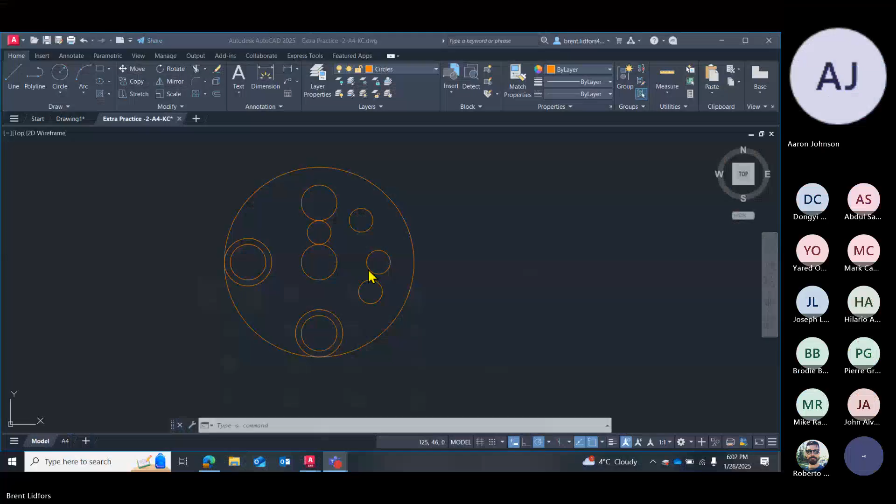So I'm going to get into our task list for this week. And let me just flip over to Brightspace here. So the week 4 folder should be available for you guys now. Let me just open it up here. We're now in week 4, so the week 4 folder is now open and available to you guys. In it is just more chapters of the textbook. Assignment 2 is posted in there, and then our weekly task list, of course. Okay, just to keep you updated with what's available now.

So starting with the task list itself, in our week 4 task list, same kind of materials here. We're just going through the textbook, kind of following along again. Nothing new there. Extra practice 1, if you haven't already done it, might be a good idea to go through it. Again, it's not for grades or anything like that, but if you do feel like you need some extra practice with some of the tools we've covered so far, it's a good idea to get through it. Other than that, for this week, we have 2 main tasks.

We're going through chapter 5 this week. We kind of started it a little bit last Thursday. We talked a bit about object selection. We're going to get into a bit more detail. We're going to talk more about editing commands this week. We have a few practice problems to cover. And then, like all the other chapters, there's a section at the end of the chapter for review questions, if you choose to do them, just to make sure you're brushed up on everything we cover in this chapter. Aside from that, we'll be covering chapter 5.

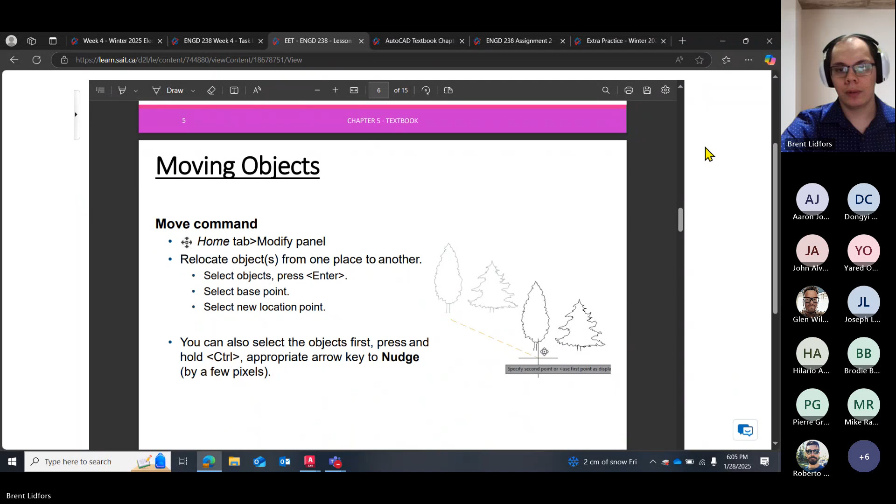So going back here with our AutoCAD chapter. So last week we talked about object selection in chapter 5.1. So we talked about the lasso tool, different ways we can select objects. This is going to become very crucial when we talk about using our editing commands, because whenever we use an editing command in AutoCAD, we have to specify which objects that we've drawn that we want to edit.

Otherwise, if I try to use something like copy, if you recall from using something like Word, if you copy paste, you have to select a block of words before you can copy and then therefore paste. Same thing with AutoCAD. You have to be able to select objects and then copy those objects in order to paste them. So object selection, it's pretty straightforward, but it is a very crucial tool going forwards.

So our first editing command beyond object selection, 5.2, we're going to talk about moving objects. So our first basic editing command is the move command. It's located in our Home tab Modify panel. You'll note that all of our editing commands that we'll be covering are in our Modify panel.

So in the previous couple weeks, we've been talking about drawing, our basic drawing commands. Those were all in the Draw panel. Now we're moving on to Modify for all of our editing tools. So starting with Move, Move is just in the top left-hand corner of the Modify panel. And this will allow us to move objects around our drawing space.

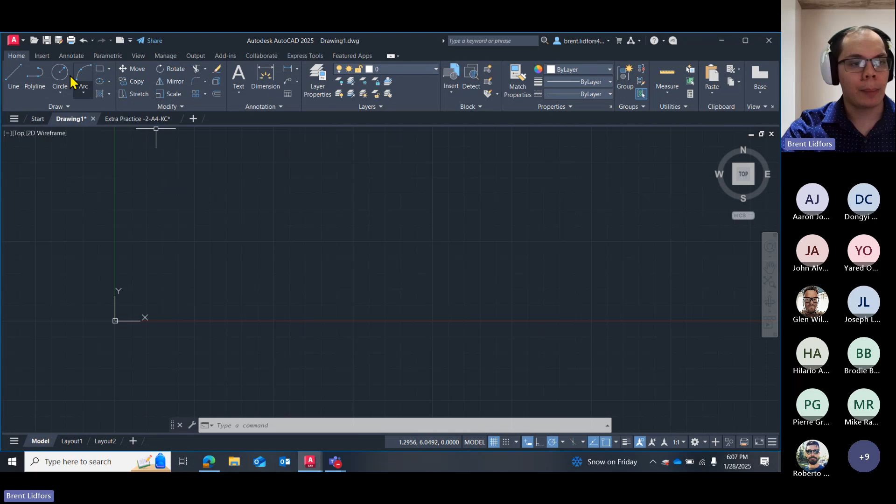If we need to relocate things, if we've drawn separate pieces of an object or an overall piece of equipment or an overall diagram, and then we need to start piecing those objects together, this is a really handy tool for that. So I'm going to draw just a few objects here. I'll just draw a circle and a line just for simplicity.

So our move command, I'm just going to click it for now. We'll talk about other ways we can use move, but I'm just going to click move. And you'll notice that my crosshair changed from a plus sign to a little box. So outside of the move command, I have the standard crosshair. When I go to select move, it's now a little box.

And I get the prompt there from my dynamic input that says to select objects. So AutoCAD's prompting me in two different ways that I am now supposed to be selecting objects. Whenever our cursor turns into that square, that's also the selection tool. So I know I'm in a scenario where I now have to go select objects.

So we talked about object selection. I can select this circle on the left-hand side in a few different ways. I can just left click on it. I can use my lasso tool to lasso around it. I can just left click on it and it'll highlight in blue. Whenever my objects are highlighted in blue, that's also AutoCAD letting me know that that object is selected.

So I've selected my move command. I've now selected my objects. The next thing to do is either hit enter or right click. Either one works to move on to the next part of the command. So I'll hit enter. And now AutoCAD's asking me to specify a base point or enter coordinates.

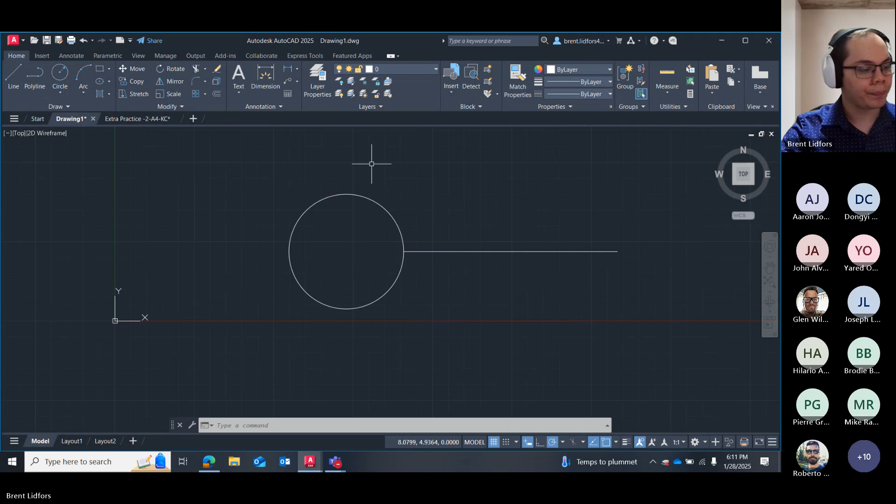So using base point in conjunction with your object snaps helps a lot with precision as well. You'll notice as well when I use the move command, and again, I'm going to grab the center point of the circle. As I move my cursor around, I have a gray outline of where that circle used to be. So it's letting me know where that circle was and now where it's going to be.

And I have a little orange dashed line that's called the rubber band. And the rubber band is also giving me kind of a heads up of where that circle is moving to. Just in case I'm scrolled away somewhere over here and I can't see the original, then that rubber band also helps notify me of where that circle's coming from. So I can come back and then see where I'm pulling it from.

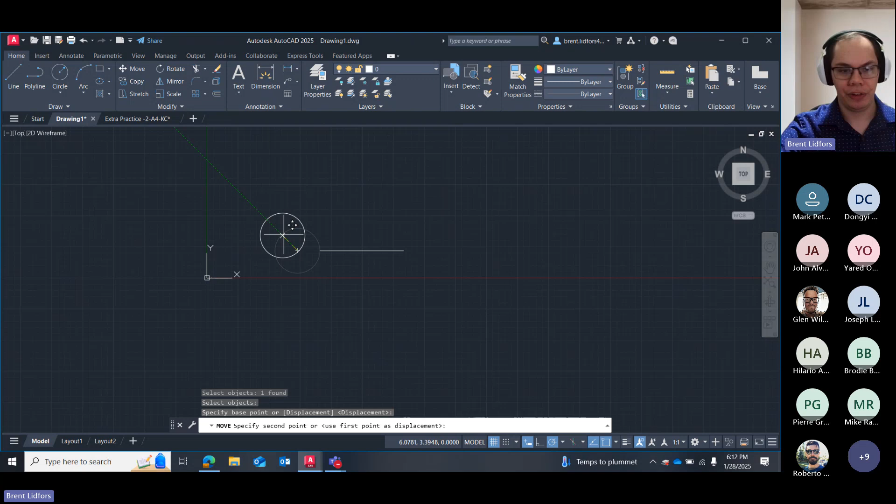We don't necessarily have to use object snaps only or click to select where this circle is going to move. You can see now that I've selected my base point and I'm moving this circle around, I would be able to click or I can use object snaps, but I also have the dynamic input prompt notifying me there that I can select a second point by using a distance and an angle.

So I don't have to click in order to place this circle. I can also add distance angle. So I can put something like 20 units, 90 degrees, and that will move my circle up 20 units, 90 degrees being north.

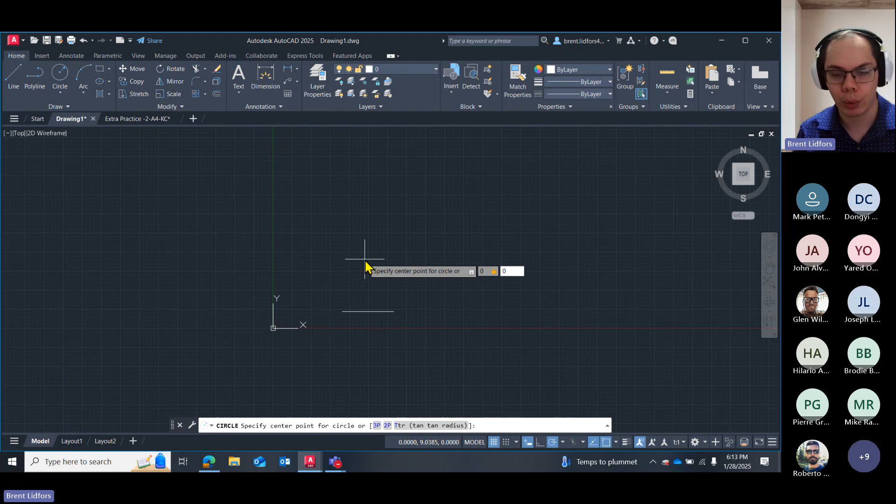And just like the line tool, instead of using a length angle, we can also use just straight up coordinates. So if I reset this circle, I'll draw a new circle just for flow here. I'll draw a new circle at the point 0, 0, just at the origin. Give it a radius of 10. This doesn't really matter, just kind of to prove a point here.

If I move this circle by its center point, I can then also use coordinates to move this circle. So I don't have to use length angle. I don't have to click. I can also use coordinates, where if I type something like 5, 5, this is going to move the center point of that circle 5 units to the right and 5 units up. So then when I hit enter, now the center point should be located at 5, 5.

Keep in mind, if you do use this method to move that circle around, the coordinates are relative. So if I do another 5, 5 here, it's going to move another 5 to the right and another 5 up. And now the center point will be at 10, 10. So if you use the coordinate method, just keep in mind it's relative. If it was originally at 5, 5 and I add another 5, 5, then it's going to be at 10, 10 as the final location there.

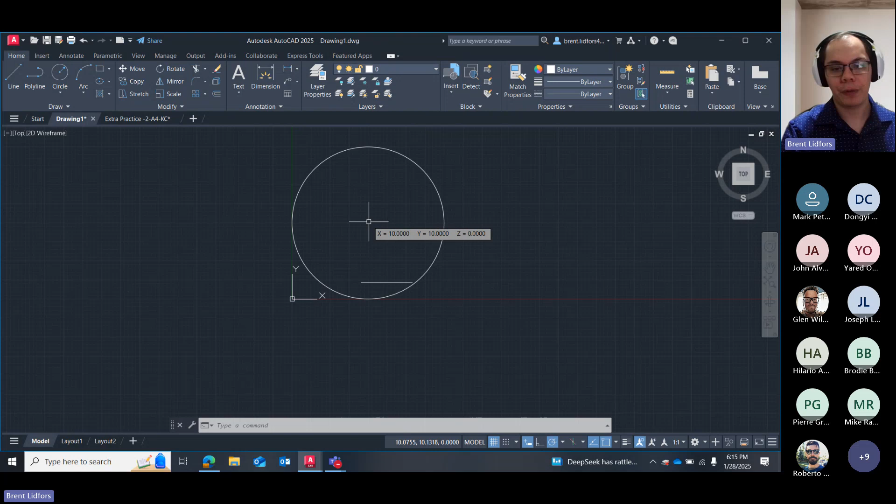Okay. So to kind of summarize, with using the move command, if I just have any circle here, I select move. Move is going to tell me on my prompt there to select objects. I select the object. I can highlight in blue. I can lasso it if I want. I'll then press enter to move on to the next step. Specify the base point or handle of this circle.

And then I can use any of the three methods. I can either use object snaps or just freehand click to select where this circle is going to be placed. I can use a length angle, or I can use coordinates to move this circle to choose its final location.

Okay. Any questions about move so far? All good? Okay.

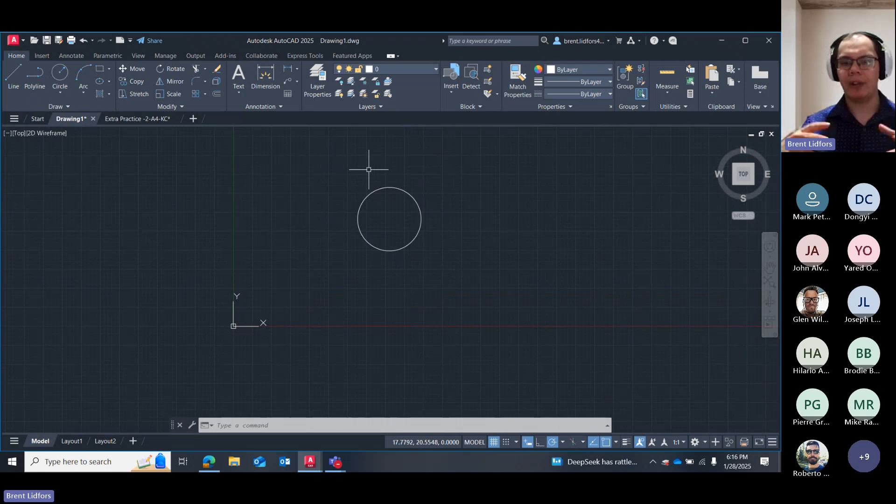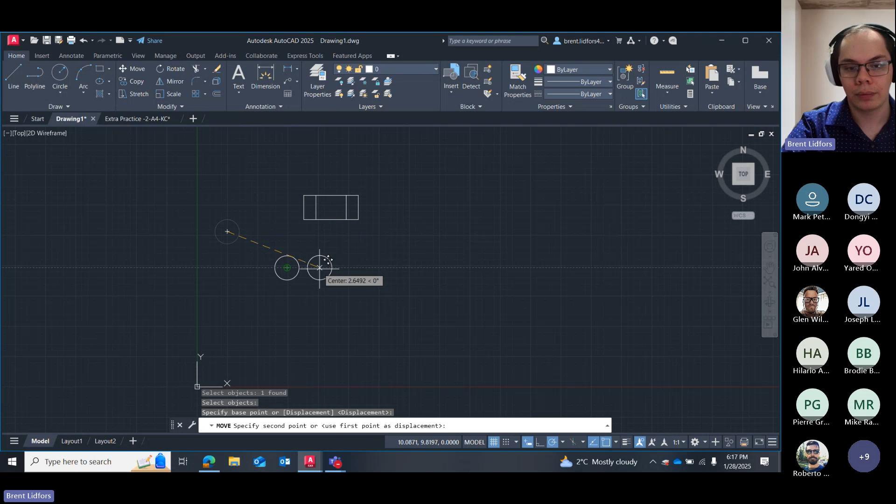I can easily use move here to move this circle. And then using object snap tracking in this case, I can type 8 and hit enter. And now I know these two circles are 8 units apart from each other.

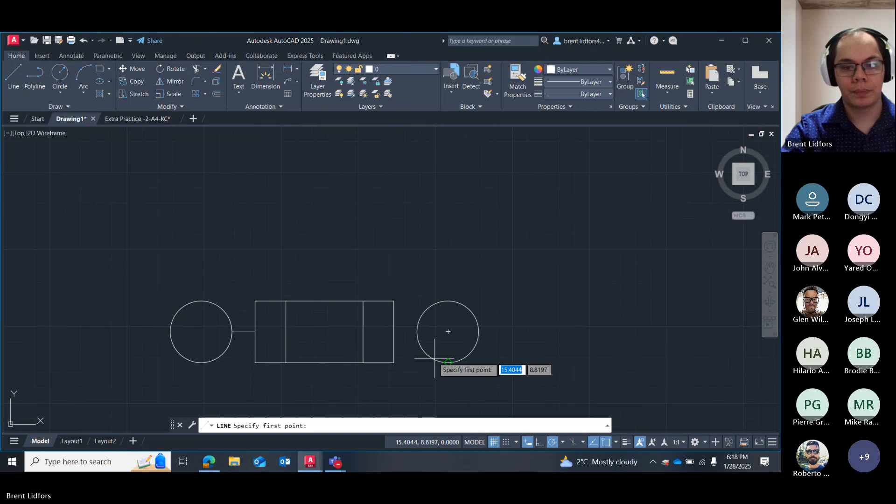And then I can take this rectangle here, using its geometric center snap, moving it by its geometric center, and I made these 8 units apart, so the center point should be 4 units across to place it right in the middle, and then I can finish it off here. And there's my fuse. So I pieced together the different objects there, and also with using object snap tracking, I was able to move the circles into the correct place for spacing as well.

A couple other things with move as well. If I have an object, I'll just draw a circle for simplicity. We don't necessarily have to use the move command itself. You can click on move, or you can type MO, MOVE. I believe the even shorter hand is just M.

If you want to use the command line, M will give you move. You can click on it if you want. If you don't want to use the move command at all, just because you're doing something really quickly, we also have a couple other ways to move objects outside of the move command.

One of these methods is by selecting whatever object I want to move. We'll highlight it in blue. And then if I just simply click and drag this object around, it will move it. Be careful not to click on the grips, these little blue squares. Those are different editing commands. If I just click along the highlighted blue line anywhere, I should be able to click and drag that object around.

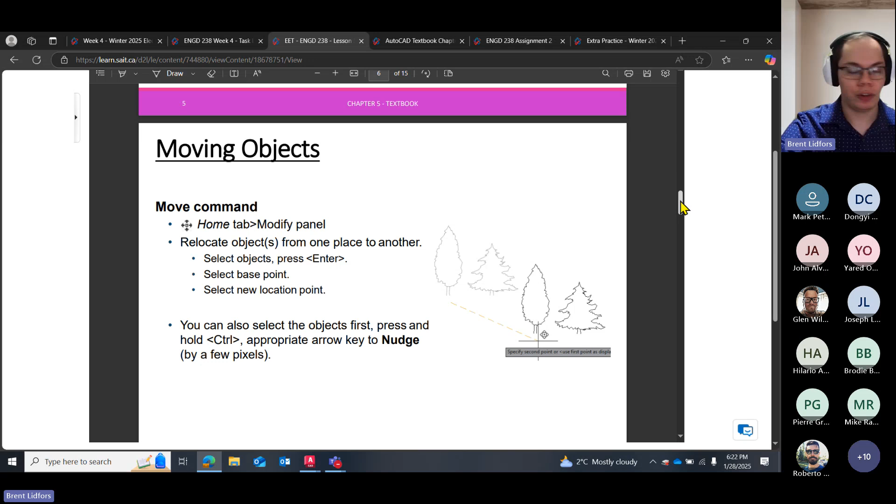So that pretty much covers moving. Speaking of which, we'll move on to 5.3, copying objects. Copying is going to work very functionally similar to moving. There's a few things to note when we're doing copy as well. We'll go through it here. I'll open my AutoCAD.

The copy command is going to allow me to make duplicates or copies of existing objects. If I have a circle here and I want more of this circle, I can use copy to make more of this circle. The copy command, just like move and most of our other editing commands, is in the modify panel. Here it is, copy. I can click on copy to make it the active command, or its shortcut is CO. CO will give me copy as well.

Just like moving, you can note right away that it's giving me the little selection box instead of my crosshair, so I know I'm supposed to be selecting objects. Again, my dynamic input also lets me know. But just in case you have dynamic input off and it doesn't show that, that selection box also lets you know you're supposed to be selecting objects.

So just like with move, I've selected the command. Now I need to select my objects. I'll choose this circle here as the object that I want to copy. Again, I can lasso it, or I can just click on it, whatever means you prefer. Once I've selected my objects, in order to continue with the command, I need to hit enter.

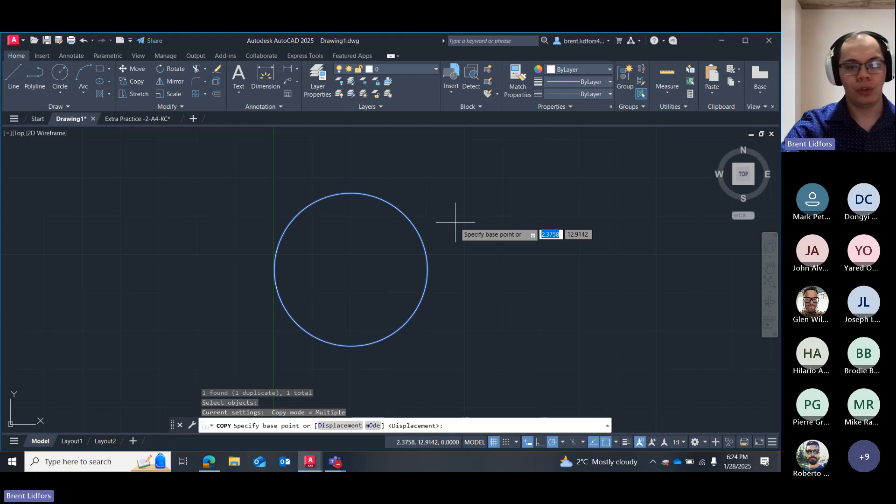And just like with move, it's asking me for a base point. Again, I can use any object snaps on this circle as a base point, or I can click anywhere else. Functionally, it works the same way. So I'm going to use the center point. And now, after I've selected the center point as my base point, I have that same rubber band showing me where the original object was and where this new object will be. Again, I can enter a length angle, or I can do coordinates instead.

When I hit enter or click, it will make a copy there. You'll notice right away after making that first copy, you do not exit the copy command. Unlike move, where I moved the object and then it exited me out of the command, with copy, I've made that first copy, and now I can continue to make as many copies as I want until I tell AutoCAD I'm done by hitting escape.

This is very similar to lines, where AutoCAD keeps prompting you to make line segments until you tell it to stop by exiting the command. So I can keep clicking, keep making circles, but as soon as I hit escape, then I'm done with my copy command.

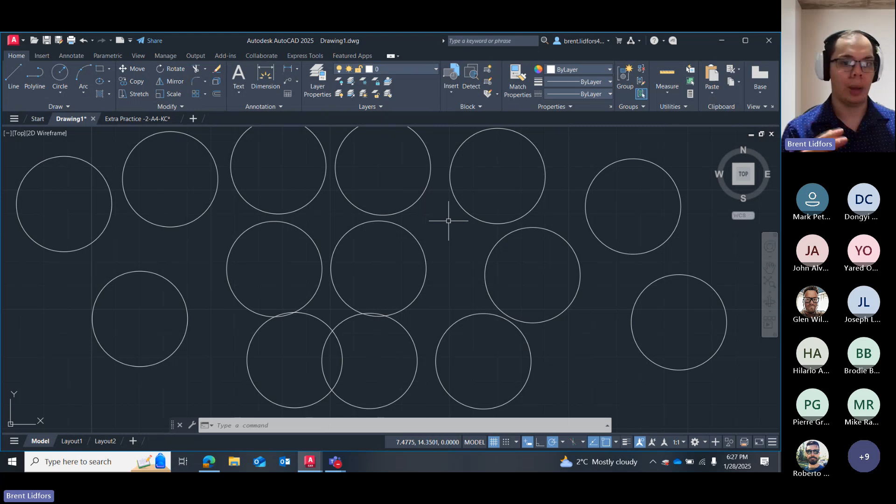So just to demonstrate here, I'm going to get rid of a bunch of these circles. We'll cover this in more detail later, but just for demonstration purposes, I'm going into my properties panel here.

At the top, this drop-down menu that says by layer, beside this little color wheel, I'm going to change this to red. Or maybe yellow - yellow's a bit brighter. So my circle's now yellow. Once I've selected it and changed it to yellow, now if I copy this circle, just to prove the point, if I copy and paste it, all of the pasted copies are also yellow. So it copies everything about that object, not just the shape itself.

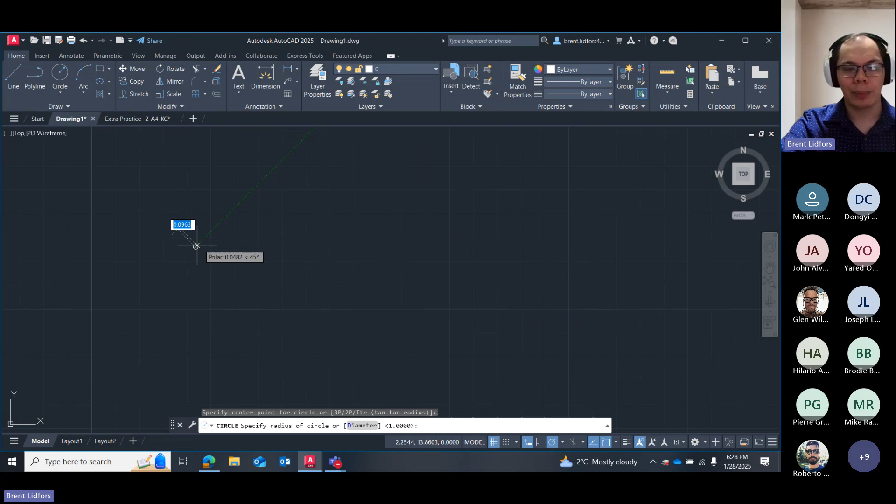So going back to my circle here, similar to move, I can select this circle so it's highlighted blue. When I click and drag, this was our rapid way of moving that circle. But if I click and drag and then hold Control and let go of my mouse, I make a copy. So this is also the rapid way of making copies.

To go through that again, I've selected the circle here, highlighted it blue. Just like with the move command, I click and drag the edge of that circle, just like when we were moving, but then I'll hold Control. You can see the little plus sign shows beside my cursor when I hold Control and let it go. So while holding Control, I can let go of the mouse and it'll make a copy.

But you must click and drag first - you can't hold Control and then click and drag, it just doesn't work that way. There's a different command in 3D AutoCAD that uses that order of operations, so it doesn't work here. You have to click and drag the object first, then hold Control, then let go.

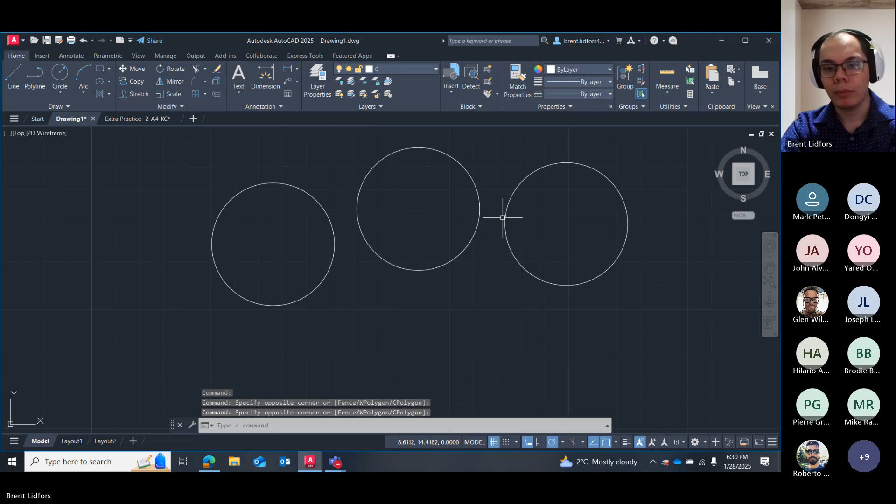Something to mention as well with the copy command is when, after I've selected my object, hit enter, selected my base point, and made at least one copy of this circle - so I've made that copy in the middle there - I can now use the down arrow menu to select undo. So again, very similar to line segments, where you can repeatedly make line segments and then use the down arrow menu or U to undo each individual line segment or copy in this case.

So I can make a few of them here.

Make a bunch. Every time I go down to undo, it's going to undo the most recent copy I've made. Same if I do U, I can type U and hit enter. This is the method to undo within a command.

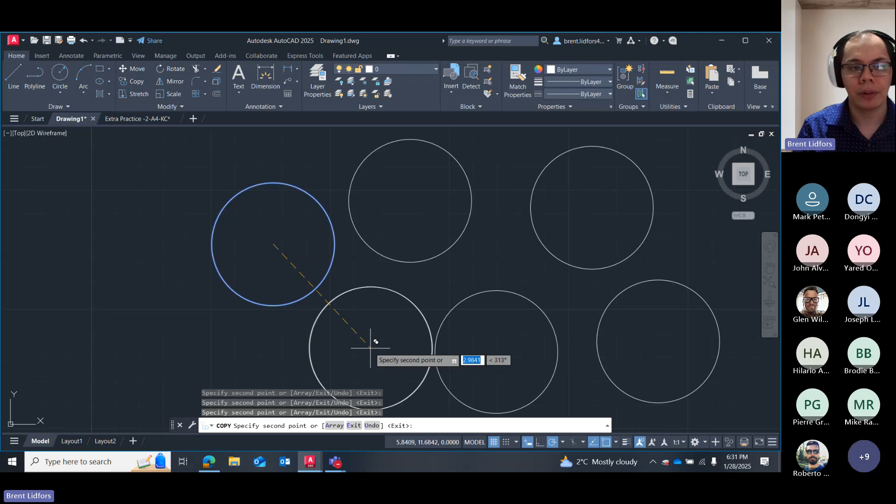The undo at the top here is on a command basis. So if I spam this undo up here, I might go too far and accidentally undo some commands. It's a little safer to do it within the command, because then you can't accidentally undo other commands you've done prior to the copy.

If I draw some lines here, and then go do my copy, just to show the point here, if I use undo or Ctrl Z a bunch of times, I might accidentally get to the point where I'm removing other commands. But if I do it within the command, I don't have that risk.

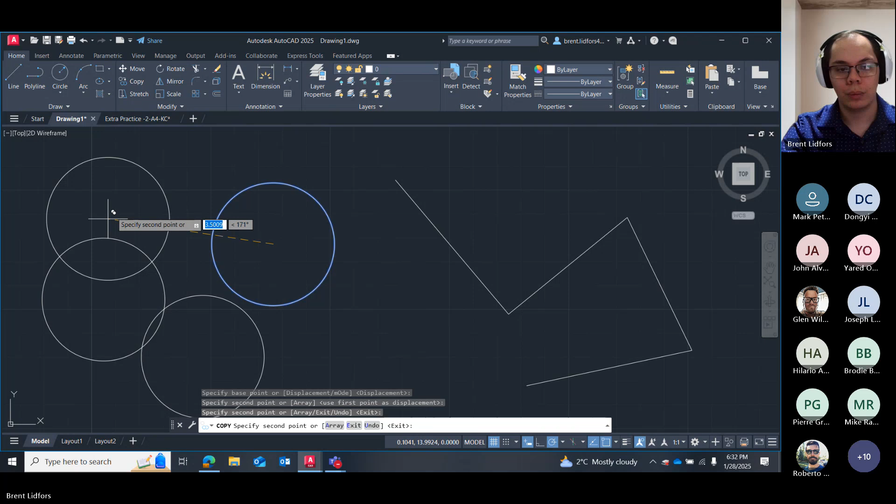Or if I make a bunch of these and keep typing U and hitting enter, it's eventually going to get to the point where it just starts denying my undo requests.

There's a couple other ways that I can copy as well. With the circle, instead of using copy or CO or clicking and dragging, we can also use our shortcut menu. If I select the circle and right click on it, that gives me the shortcut menu. Remember, whenever you use right click to enter a menu, it's called the shortcut menu.

In here, I have a section called clipboard. In clipboard, I have my cut, copy, and paste. We have a couple options for cut and copy as well. We can copy without a base point, or copy with a base point.

This is going to control whether or not I'm selecting this object with a base point. If I do not select a base point, AutoCAD automatically assigns a base point to the bottom left of the object. So copy with base point lets me select where that base point should be, like the center.

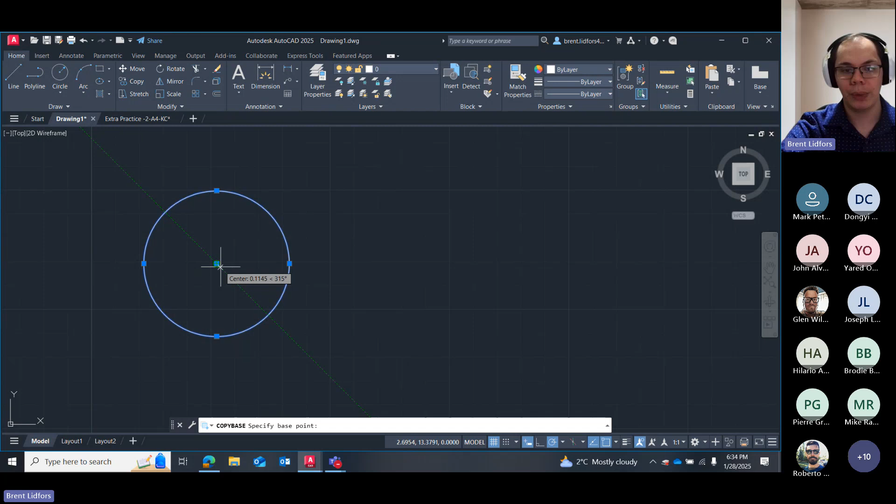Then when I go to paste, by right-clicking, going to paste, now I have it by the center point. But if I choose to copy without a base point, and go to paste, now AutoCAD's automatically assigned a base point to the bottom left of that object.

Right-clicking anywhere, using clipboard and paste, will recall what I've most recently copied or cut. The clipboard paste works functionally the same as most other software. If you used copy and paste by right-clicking to the shortcut menu in Word or Excel or anything like that, functionally it's the same thing, except for the added caveat of the base point, because we're drawing objects.

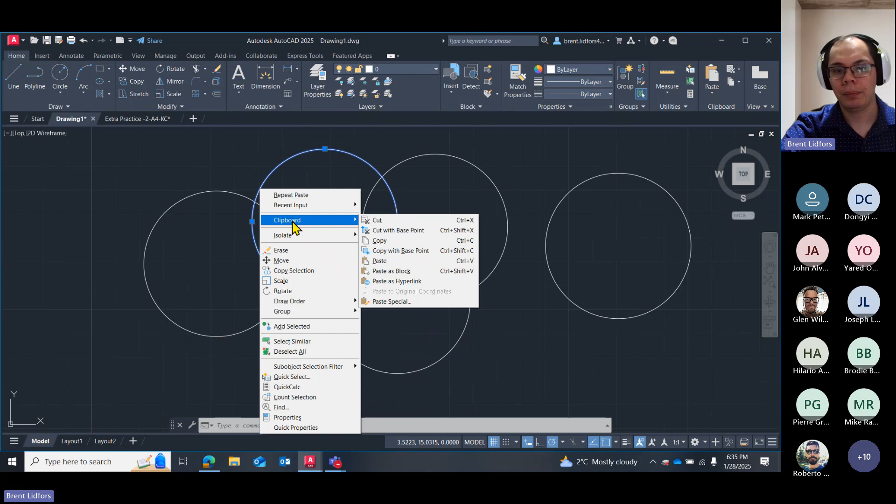With cut, copy will leave the original intact, but if I use cut, the original disappears, but I can recall it with paste. So the only difference between cut and copy is if I want to leave the original intact. Copy will leave it there, and cut will get rid of it.

So if you prefer to use the shortcut menu because you don't like reaching up here or you don't like typing, if you prefer using mouse only, those are methods to do so.

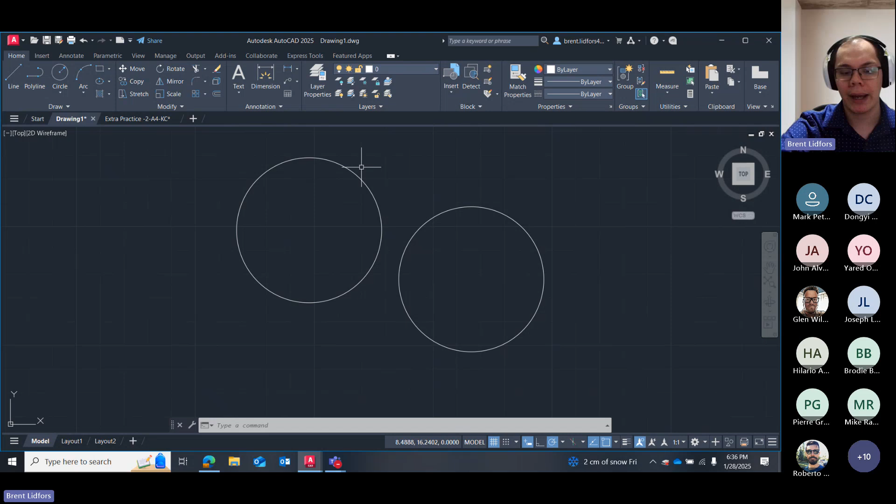We can also use the shorthand, the shortcut for copy and paste as well. You might be familiar with Ctrl-C, Ctrl-V. Those also work in AutoCAD. If I use Ctrl-C, I just have to select the object first. Ctrl-C, Ctrl-V will also give me the option to paste.

I'll use a rectangle just to show I'm not using the previous command here. So Ctrl-C, Ctrl-V. Ctrl-V will recall that rectangle. Keep in mind, this is the shortcut way of using copy and paste, so it's not going to let you specify the base point.

If I want to specify the base point and use the shortcut key, I have to do Control-Shift-C, and that will ask me for base point. So Control-Shift-C, it'll give me base point, select the base point, and then when I go to Control-V, I can place it wherever based on that base point.

I'll use not the bottom left to prove my point here. We'll use a geometric center. So Control-Shift-C, use the geometric center here. Control-V brings it back up with the base point.

You can also see when you go into the shortcut menu under clipboard, it also gives you the keyboard shortcuts here. Copy being Control-C. If you want to use it with a base point, Control-Shift-C. Paste being Control-V. We're not using paste as block just yet, so mostly these first five here.

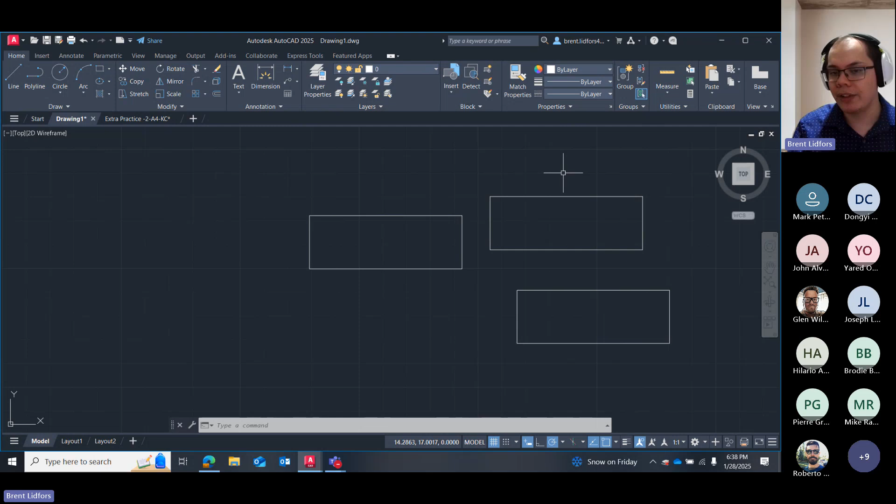If you're moving around text, you might not care about precision that much. Or if you're drawing a diagram and the dimensions don't matter because it's just a diagram, then maybe you don't care. So it's up to you, and it's up to the application as well.

Any questions about copying before we move on?

Well, that's very good. Thanks. Yeah, no problem.

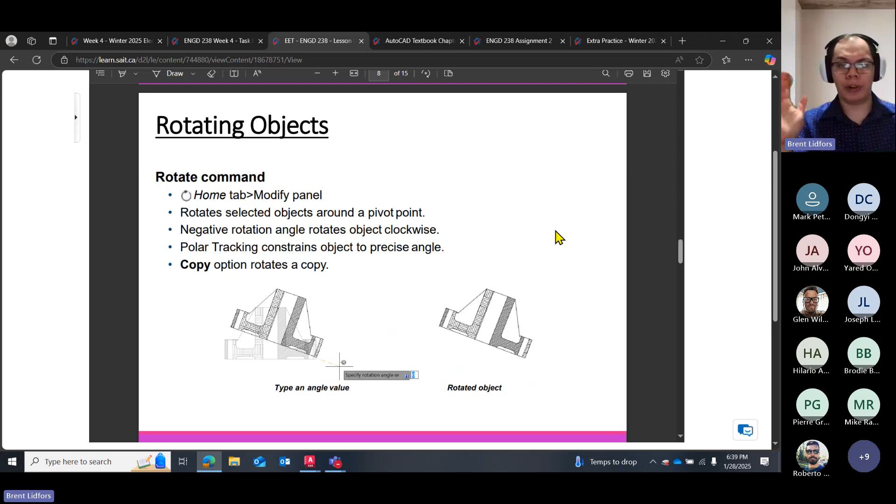Okay, continuing on then. Moving on from copy, we have rotate. It's often handy to rotate objects. Sometimes we draw them perpendicular, right side up, so it's easy to draw and easy to conceptualize when drawing. Then maybe we have to pivot it at a weird angle so it connects to something else later. Plenty of reasons why we might use rotate.

I'm going to draw a rectangle because my circle won't be obvious for rotating here. With rotate, being in our modify panel again, top center, if you choose to use the shortcut it's RO, or you can type out the whole word rotate. This will also give me rotate. Just like our other editing commands, it's going to have a selection, it's going to have a base point, and so on.

With rotate, I select objects, hit enter, and now specify the base point. In this case the base point has a slightly different definition. Rather than the handle I'm grabbing to move or copy, this is now my pivot point for rotation. So this is the center of rotation. If I choose the bottom left corner of this rectangle, I'm now spinning that rectangle around that bottom left corner. In some cases with move and copy, you might not care where the base point is that much, but with rotate it's going to matter quite a bit.

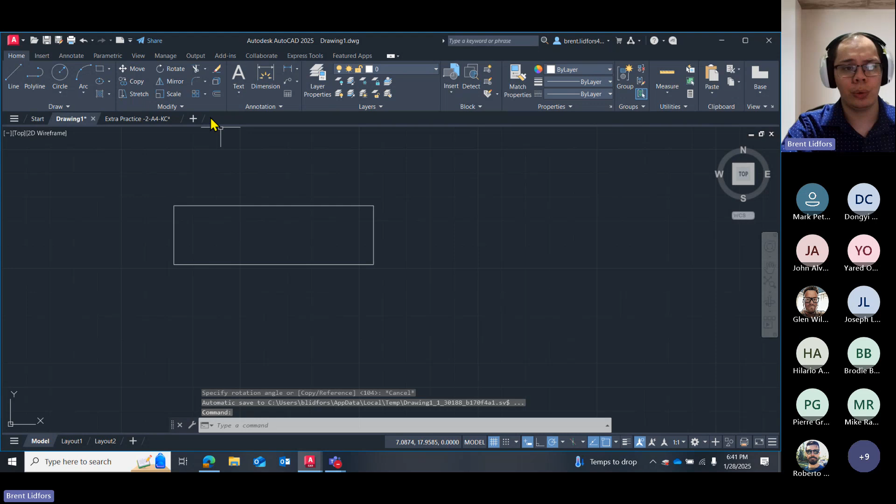If I choose rotate and select the base point somewhere off the rectangle, it's going to rotate around that point. That might cause some differences because the radius of rotation is now larger than if I pick the corner.

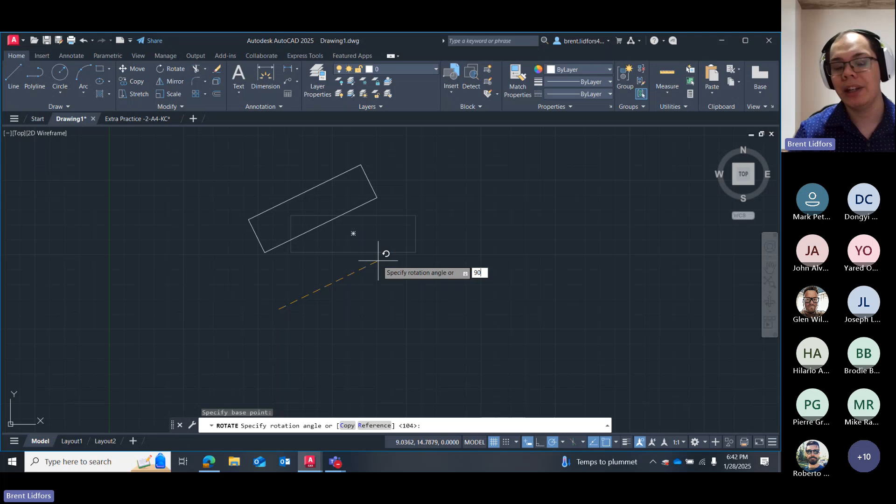After I've selected that base point or pivot point, I can move my cursor around and the new object will be shown there, with the old object grayed out in the background. I can freely rotate my object. On my dynamic input, I can also specify the exact angle of rotation. So if I put 90 in here, it should stand my rectangle up vertically. Hitting enter, my rectangle is now vertical.

Something to keep in mind here: the rotation angle is always counterclockwise for the most part. This isn't like other tools where it was 180 degrees on top, and if you move your cursor below it flips to the other 180 degrees going clockwise. This is always positive counterclockwise.

Therefore, if I want to move this clockwise, I can make a negative angle instead. So if I do negative 90, it should rotate so the rectangle's down here, because that's 90 degrees clockwise. It shouldn't be on the left—if it was on the left, then it would be a positive 90. So negative 90 sets it down to the right. And if I undo that and do a positive 90 rotation, then it should be down to the left here.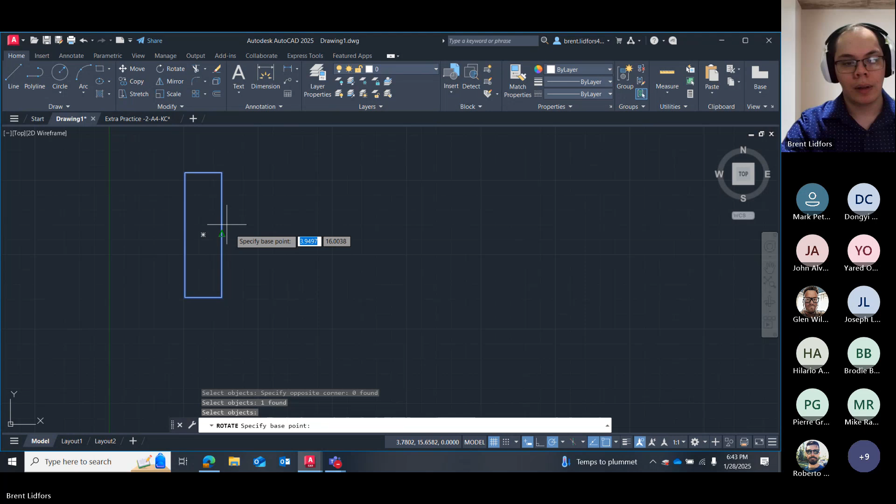When you enter this number, it's always going to be positive counterclockwise, and negative will put you clockwise. So I can put angles greater than 90, even greater than 180. If I undo again here, negative 90 degrees should flip it down to the right. So that should also be equivalent to positive 270 degrees. If I do positive 270, that should also lay it flat down to the right. Either way works, whatever makes more sense in your head.

If you want to change it so clockwise is positive—which is why I say it's not technically always positive counterclockwise—you can change it in the settings. If you go to your application menu, drawing utilities, units, you can change your angle to be clockwise there.

That's up to personal preference. Standard convention is counterclockwise positive, but if you do prefer it to be clockwise positive, then this is where you can do that. Okay.

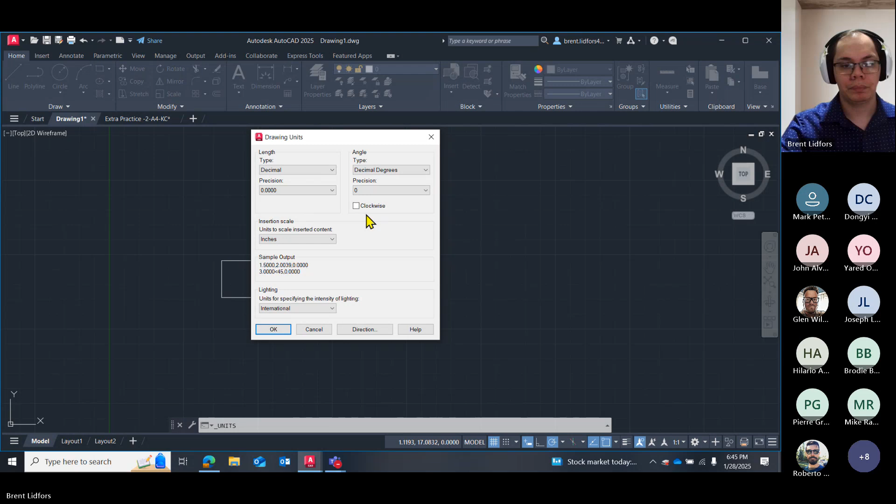Something to keep in mind with rotate is that with copy and move, we're very reliant on object snaps if we want to do it quickly. Rotate is going to be a bit more reliant on polar tracking to be accurate. So if I rotate this object, and I don't necessarily want to go through the typing to specify the angle, I might use polar tracking to help me out with that angle. So I can use my polar tracking angles to snap to those specific angles.

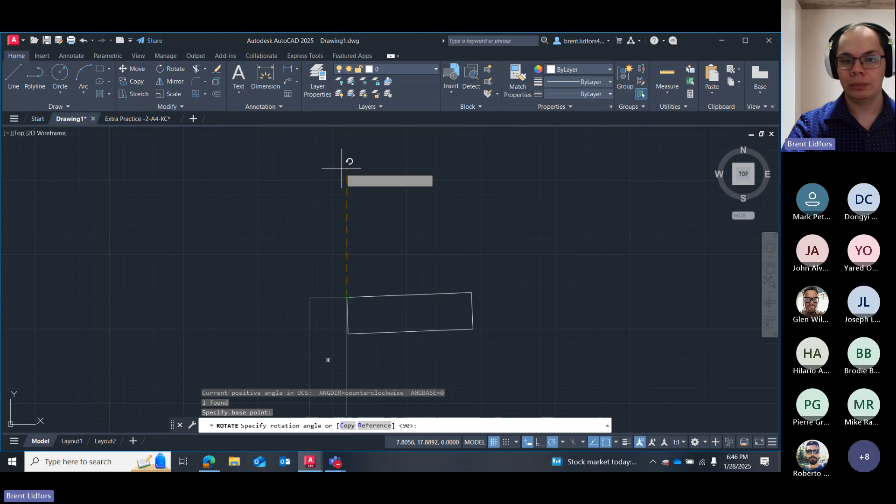Just in case I don't want to type if it's a bit too slow, I can quickly at a glance know that this is 90 degrees, so I can quickly snap it. Same if I need to move it another 90 degrees or 180. It's a quick way to snap to a specific and precise angle to rotate that object. So use polar tracking in tandem with rotate to make sure your angles are precise.

It might be precise when I first drew it, but if when I go to rotate it, it's not an exact amount of degrees of rotation, then I can develop some imprecision in my drawing as well. Okay.

Last thing with rotate is that when I select my objects with rotate, move on to the base point, I've selected my base point. I'm now rotating the object here. I can also use copy in tandem with rotate. So I'm rotating the object, but if I press down arrow for my dynamic prompt little extra menu here, I also get copy in this menu.

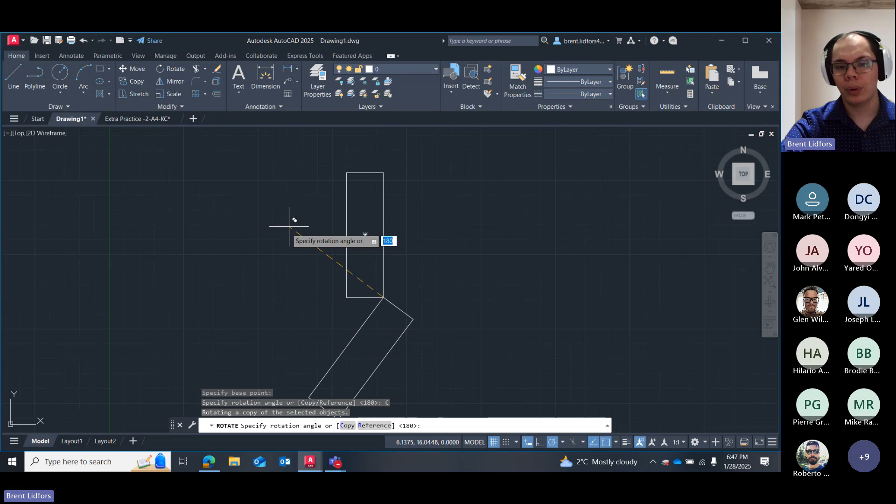So going to copy and hitting enter, you can see that my original is now highlighted white again. It's no longer grayed out. And I have the new rotated object. So this will leave the original intact and make a copy that is now rotated. So I can do copy within the rotate command.

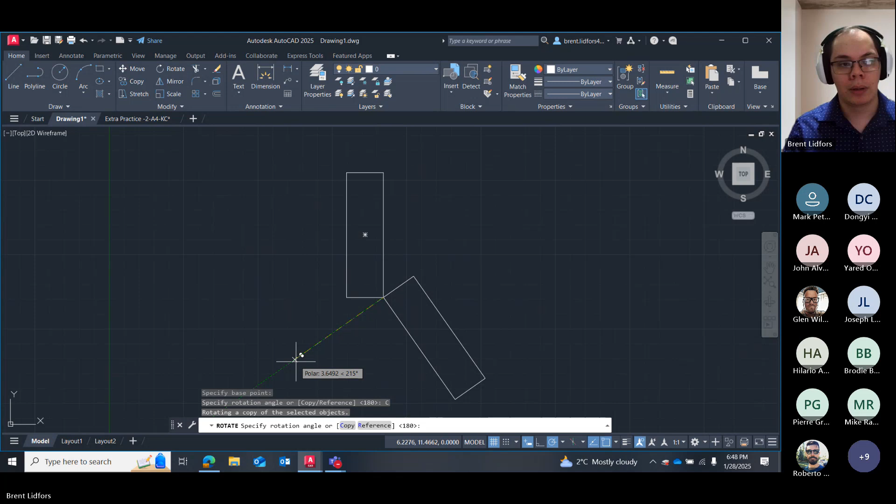This is handy if you need to do something that has some sort of radial symmetry. If I have one rectangle upright and I need to do another one down here or at 45 degrees or something, then this would be an easy way to make duplicates, but there has to be some sort of radial component to it. It has to be rotationally part of that equation. Otherwise, I just use a regular copy command, right? So then I can hit enter, and now I've made a copy and rotated the copy at the same time.

Okay. Again, if you prefer using rotate and copy as separate commands, you don't want to mix them because it gets a bit messy, by all means, use them as separate commands. It's just a way to speed things up. Okay. Any questions about rotate? All good.

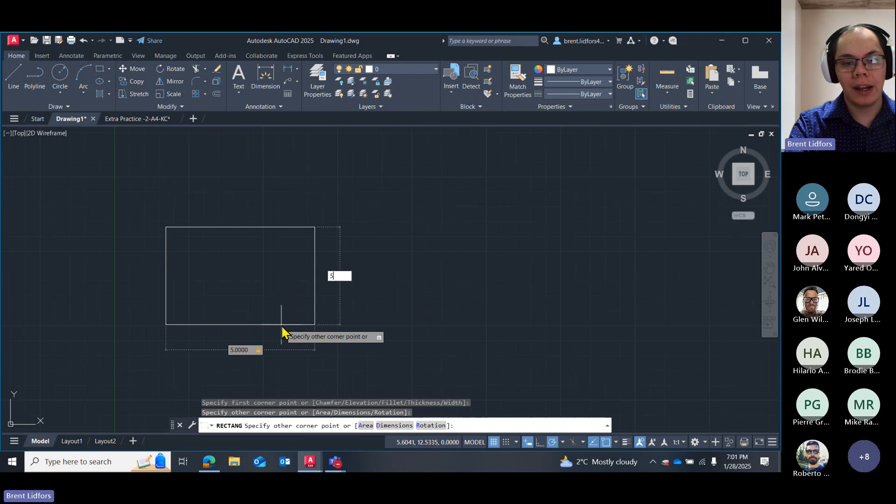Again, I'm going to draw a rectangle here. Let's just do a rectangle for ease. I'm going to make it 5 by 5. It's a 5 by 5 square. And with the scale command, I can select it from the menu. I can type it in here, SC for scale. And just like all the other editing commands, it's going to ask me to select objects. So I can lasso, I can left click, whatever I need to do to select that object.

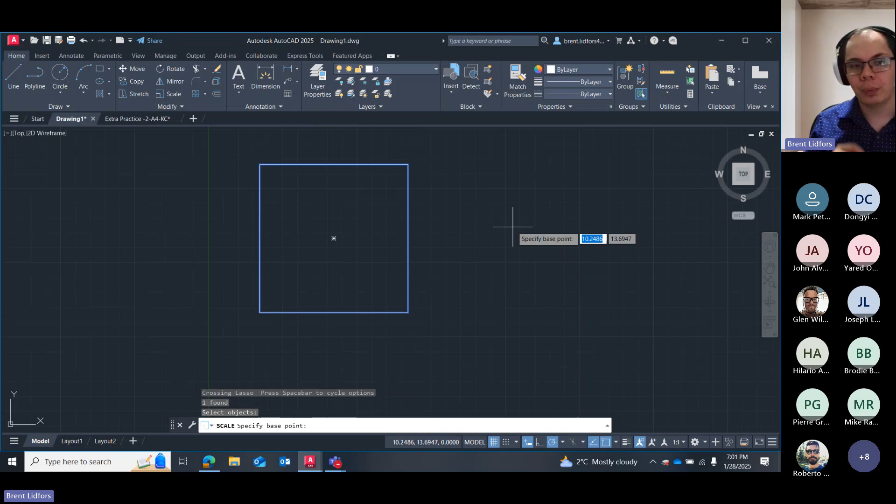Hitting enter to confirm that I've selected all of my objects. And then specifying the base point. So the base point with scale isn't highly critical in most cases. If you want to keep it in one same spot, it can be handy. This base point is going to be the point that this shape will expand or contract from. So if I choose the bottom left corner of this square, now I am expanding and contracting that square based on that corner piece.

Okay. If I exit out of this command, I can also use scale, select the object, specify the base point as the geometric center, and now I am expanding and contracting around the geometric center of that square. So all sides are moving equally. Okay. So this is the point in which I am expanding or contracting that object by.

I can move my mouse cursor to expand and contract that square, or I can type in or specify a scale factor. So you can see on my dynamic input there, it says specify scale factor. Any number smaller than 1 is going to decrease the size of my square. If I use exactly 1, it's going to keep the same size because I multiplied the size of that square by 1, so it should keep the same square. And any number larger than 1 is going to increase the size of this square.

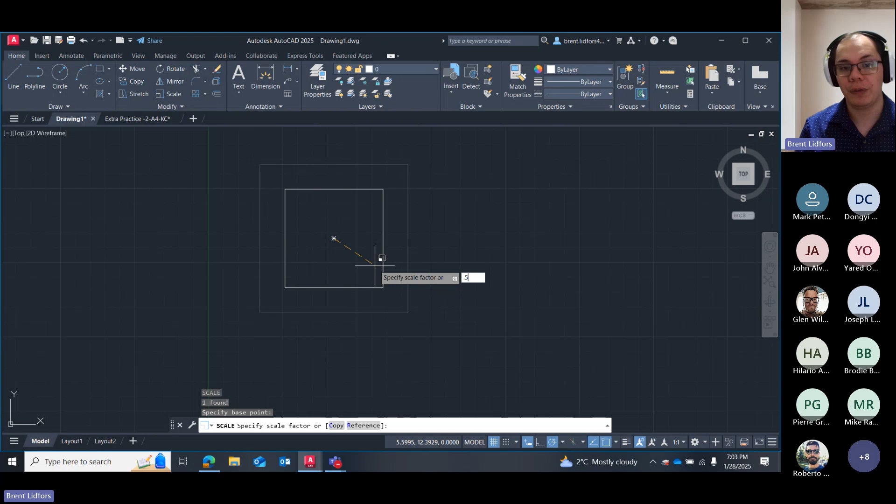So if I wanted to exactly make this square half as big as it currently is, I could put 0.5. 0.5 would be half, 50% scale of this square, and hitting enter, now my square is half as large as it was before. This scale isn't on an area basis. It's not half area. It's half of if all the points were moved halfway inwards to whatever your base point is.

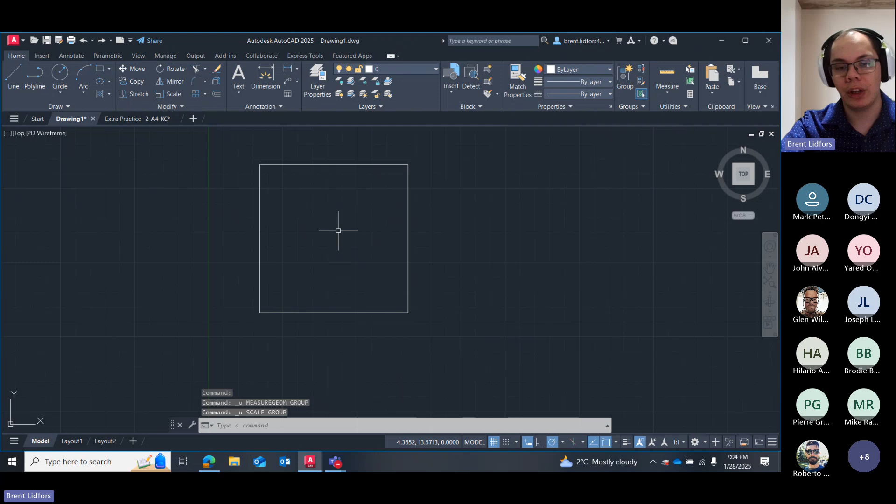If I go back to my original square, my 5 by 5 here, when I reduce the size, then if I go to measure this now, all the sides are 2.5. Okay. So if I use a scale factor now of something like 2.0, that would double the size of the square. So if I put in a scale factor of 2, it's now twice as large. It's now a 10 by 10 square. Okay.

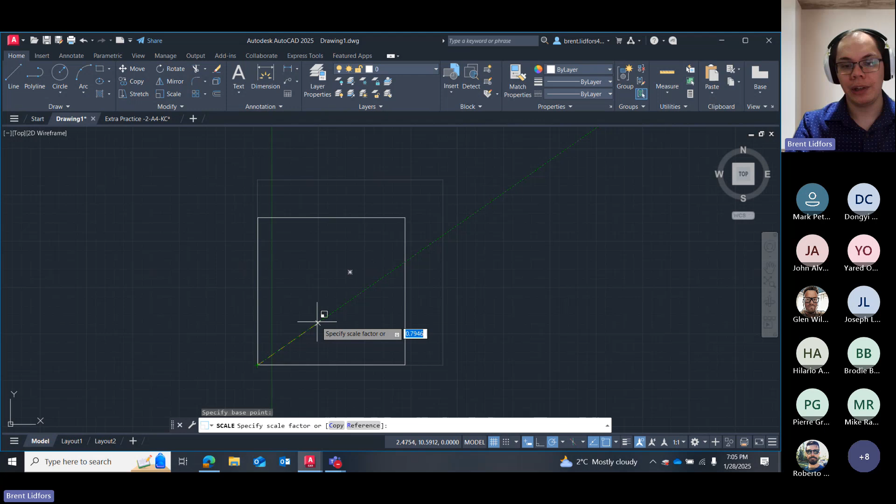Just like with rotate, you can also use copy within the scale command. So I can use scale and then use something like the bottom left corner as my base point for that scale. But I can type C or copy in here in my dynamic input menu. And this will also allow me to keep the original intact, but now the copy that I'm producing is scaled.

So I can put in something like 0.5 in here. And now I have two squares. The sides are halved in magnitude for the second square, and the original square has its original 10 by 10 dimensions here.

Okay. And remember, it's not half area because this bigger square is now 10 by 10, so total area of 100. This smaller square is now 5 by 5, so an area of 25. So it's changing the side lengths or the positions of the corners of this rectangle. It's not half of the area. Same if you do it with a circle. It's like half of the radius, not half of the area of the circle. Okay.

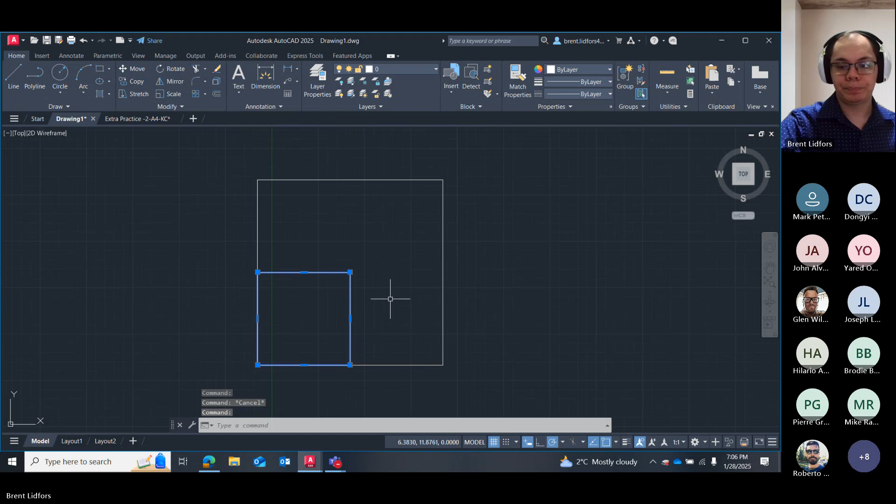So that's pretty much scale. Any questions about that? It's typically a bit handier when you're using copy in scale. When you use scale by itself, it has a bit more limited applications. You could have just drawn the object the right scale in the first place. So it doesn't really make much sense to rescale things as they exist unless there's amendments to be made to a drawing, if there's changes that happen that require you to change the scale of the drawing.

Generally speaking, it's not horribly common. It's usually to make a shape within a shape that's scaled, like my two squares there, which is generally a bit more of a useful application.

Brent, for circle, will it do the same thing for the radius, or will it count as the whole diameter? Yes, same thing. Diameter and radius, if I have either of them, I should end up with the same kind of deal. So if I have a 5 radius circle here, or same thing if it's a 10 diameter circle, same idea. But if I go to scale these now, using the base point as the center, 0.5,

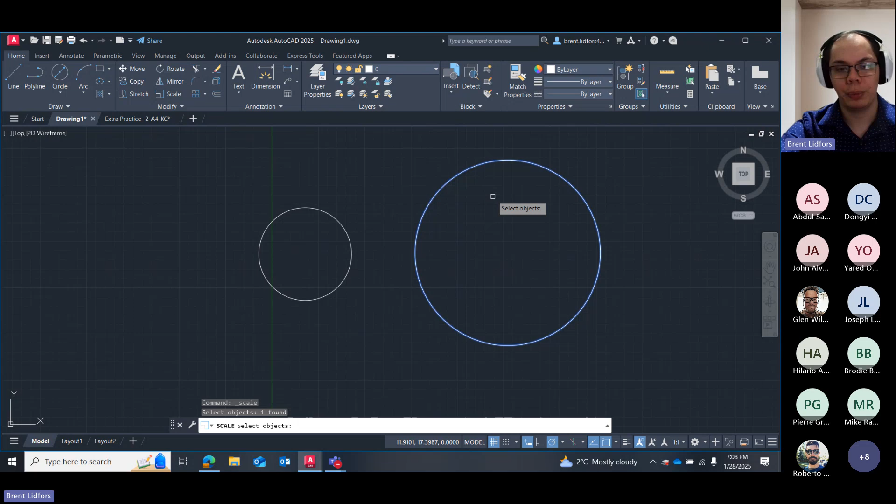if I scale either of these, 0.5, it doesn't like that very much. I chose the wrong base point, that's why. Then they're both the same. So it's always halving the diameter or the radius. It's effectively the same. This is 2.5 on the radius now, if I go to measure it. The original radius was 5. Or if I double that, the diameter is now 5, but the diameter was originally 10. So it's halving the diameter or radius of the circle, effectively the same thing.

Okay. Does that make sense? Yeah, that's good. Thank you. Yeah.

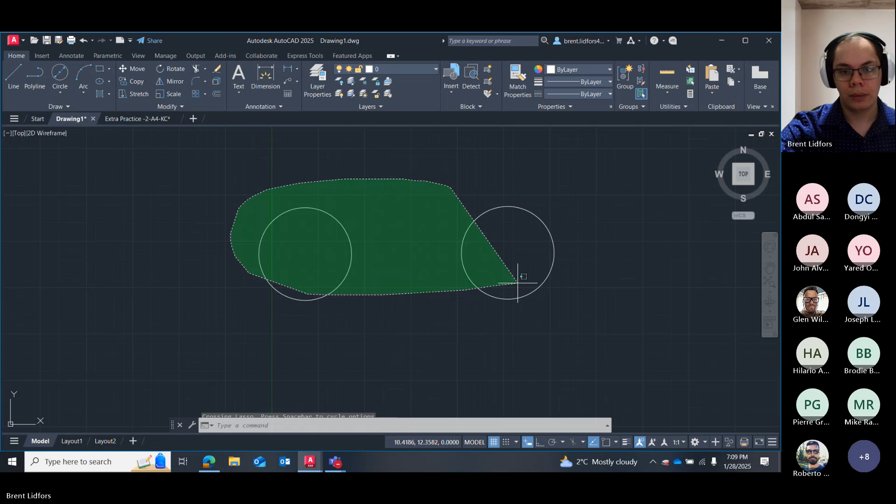Yeah, if I have a diameter of 10 and it goes down to a diameter of 5, or a radius of 5 halves to 2.5, it's effectively the same. Okay. So that's it for scale.

Our last editing command for today is mirror. So mirror is going to allow me to create a new object or copy an object, we'll talk about that as well, across a line of symmetry. Okay. So if I go back to AutoCAD here, I'm going to use a triangle because it's a bit more obvious. This isn't going to be any specific triangle, it's just going to look like a triangle.

So I've made my triangle here, and my mirror command, again, in the modify panel here, we have mirror. I can also type mi, gives me mirror. And just like all my other editing commands, it's going to require me to select objects. Press enter to continue on, let AutoCAD know I'm done selecting objects.

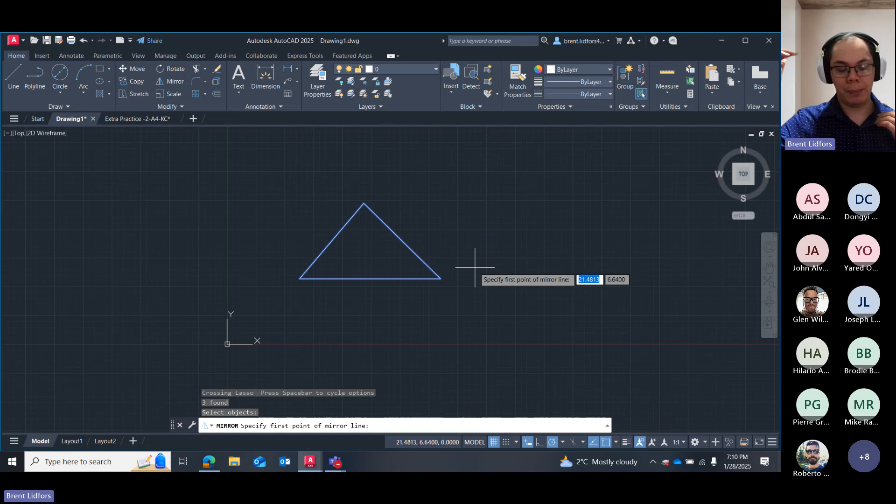And now, normally with my other modify commands, it would be asking me right now for a base point. With mirror, it's going to want me to pick the first and second points of a mirror line. You might also call this the axis of symmetry. This is the line that this object is reflected over. So if I make a 90-degree vertical line here, then my triangle should be flipped onto the other side of the line.

And let me make a right angle triangle because it's going to be a bit more obvious. So I have a right angle triangle here. If I mirror this now, I need to select my mirror line. This doesn't have to be anything precise because it's just a line of symmetry, right? The only precision I need to worry about is the distance from the object to the mirror line. And I'll show you why.

So if I choose the endpoint on this triangle here, and then do 90 degrees upwards, you can see that mirror line I'm creating is now the axis of symmetry that the triangle is being reflected over. Okay. But the only thing I really have to consider is the distance of that mirror line to the object.

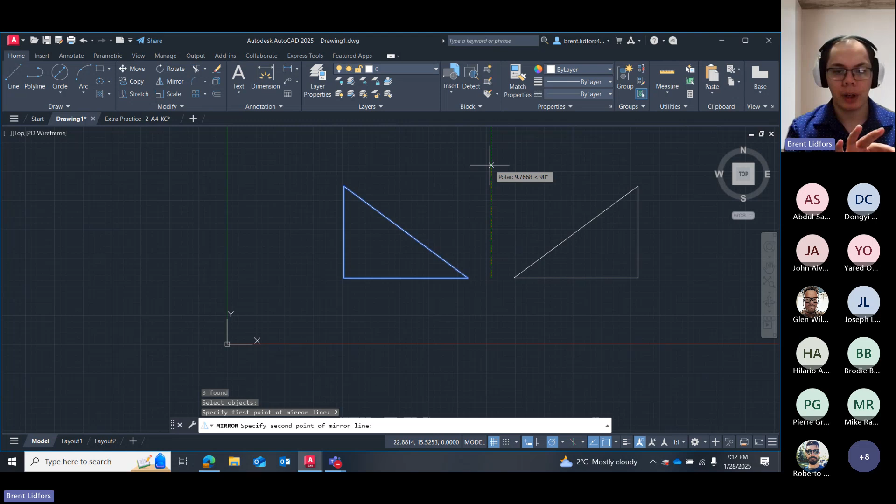If I now make this mirror line, and I'll use tracking to set that distance as 2, now my mirror line is 2 units away from the object, and the reflection is also 2 units from the mirror line. Okay, so it does depend how far the mirror line is from the object. It doesn't depend on how long the mirror line is. I can make the mirror line very small and it wouldn't matter.

If I make the mirror line against the endpoint here and only make it about a unit long, doesn't matter. AutoCAD knows that line extends infinitely upwards and downwards. Anywhere along this line, I get the exact same mirror as long as I'm on this tracking line. So the main thing to keep in mind is how far the mirror line is from the object, because that also changes how far the reflection is from the mirror line.

Then I can click. Normally with our other editing commands, it would just do the command and I'd move on. But with mirror, it gives me a little question. With dynamic input, it asks erase source objects, question mark. What this means is, do I want to erase the object I started with? Do I want to keep the original or get rid of it?

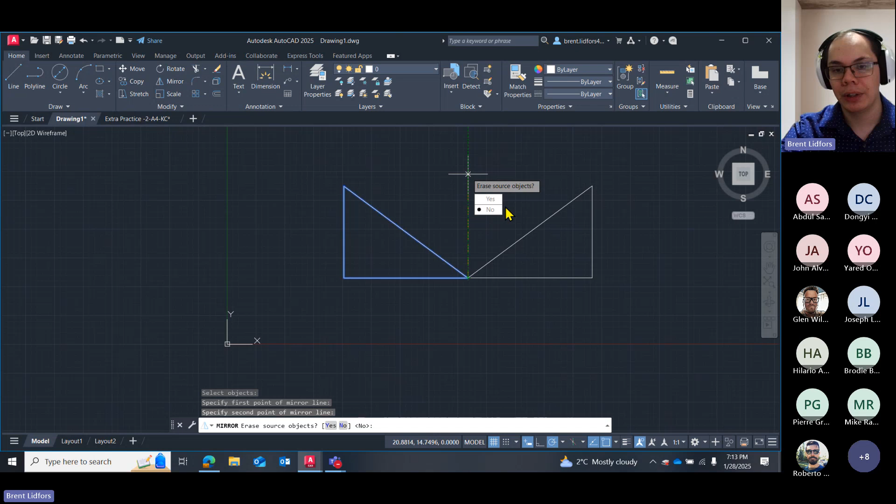If I choose yes, it removes my original object and only keeps the reflection. If I choose no, then I will have both the original and the reflection intact. So if I hit no, now I have both triangles. But if I choose yes, again setting my mirror line, then the original disappears and I'm only left with the reflection.

So mirror can be used for 2 purposes because of that. If I just want to swap its orientation, I wouldn't want to keep the original. But if I'm drawing something very symmetrical, I might want to keep the original because it saves me half of the work, right? If there's a requirement for 2 triangles to be meeting, I can use the quick mirror command to draw that triangle rapidly without doing it manually.

Just like with my fuse, if I go back to my fuse here and I draw my stuff, oops, or is that fine? Good enough. So rather than drawing the second circle, this one's a bit simplistic because drawing the circle is not difficult. What I'll do actually, let's get rid of one of these lines.

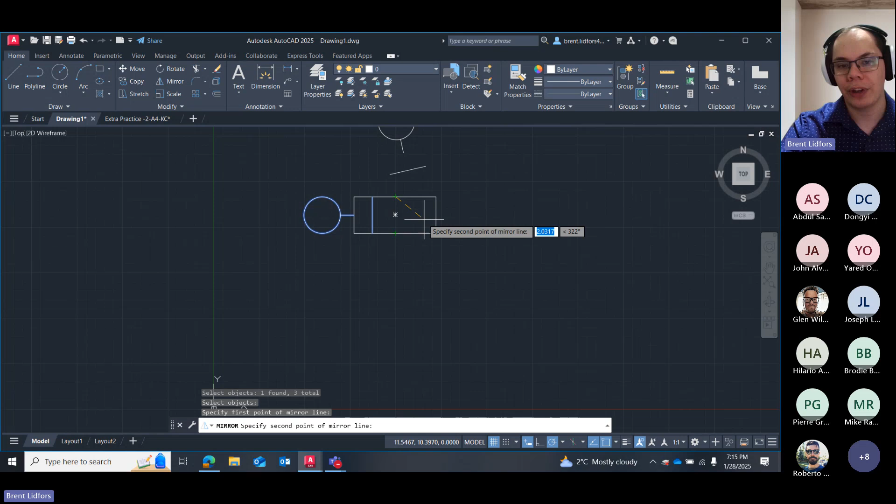Okay, so what I can do here is draw half of the fuse. And then instead of taking the tedious work of drawing this next line, the connecting line and the circle, I can use mirror to select those three pieces, hit enter, go midpoint to midpoint, and that just saved me 3 commands of drawing, right? Because I didn't have to draw this piece now. And then if I select no for erasing source objects, now I have both.

Of course, this fuse symbol is pretty simple, but when it comes to more complicated drawings that might have some sort of symmetry to them, it saves a lot of work down the line. You can save up to 50% of the amount of time that you have to spend on a drawing, if there is that symmetry available. Okay.

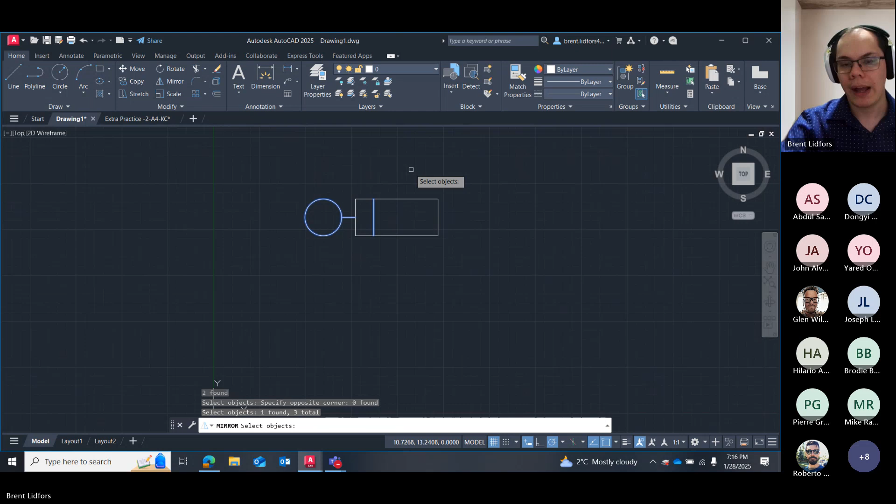Another thing to keep in mind with mirror is using polar tracking as well. So as I've demonstrated a little bit, when I go to mirror this object here, a handy tool to use while mirroring is polar tracking. So if I select the first point, I can make sure that that mirror line is perfectly 90 degrees, so everything lines up properly by using polar tracking.

If I were to turn my polar tracking off and just eyeball it, now my lines are not properly aligned and they're a bit crooked. So polar tracking can help us both speed up and be more precise with mirroring as well. Okay.

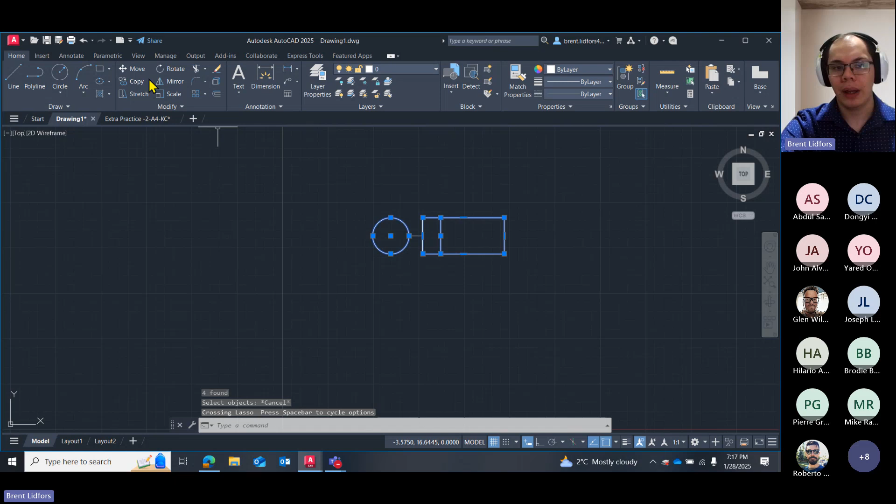So just to recap mirroring, I use my mirror command. Something I should mention as well, you don't have to select the command first and then select the objects. You can select the objects first and then the command. It also works. Either way, you get the same outcome. So if you have the tendency to select objects first, then hit mirror, that's fine. Or if you want to hit mirror first, then select the objects, both ways work.

Okay. So again, with mirror, selecting my objects here, press enter. I now need to draw my mirror line, which will be around the center of this fuse symbol. And then by clicking, it asks me if I want to erase my source objects. In this case, I have symmetry. I want to keep both parts. I'll say no, because I don't want to erase the source object.

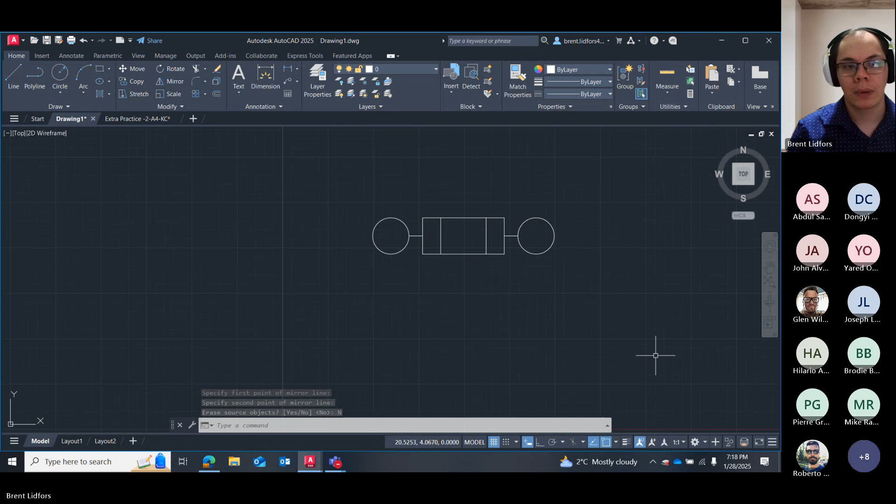There are some cases where I might be drawing a triangle here. Turn my polar tracking back on. And I just want to simply flip this triangle. I don't want to draw something with symmetry, but I want to flip this triangle. So I can use mirror to use this axis of symmetry to flip the triangle over.

I can hit yes to erase source objects. And now I've just successfully mirrored or flipped that triangle so that the right angle is on the other side now. Okay, so it's kind of a dual purpose. Any questions about mirror at all? And of course, you don't have to use 90-degree angles. You can do 45-degree angles, whatever angle you wish with the mirror line.

Okay, if there's no questions, that pretty much covers what we're going to be talking about in terms of me lecturing for tonight. I'll go over assignment 2 real quick if you want to get a head start. And then after I've talked through assignment 2, the rest of the time we have remaining is for you guys to go through 5B in the textbook. 5B is a little exercise in using some of the modifying commands that we've gone through.

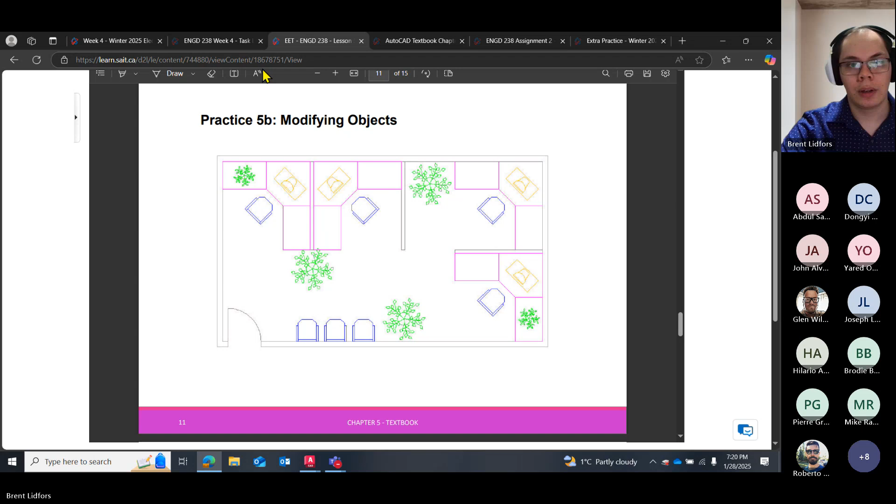For assignment 2, our procedure is to complete extra practice 2. Assignment 1 was a couple projects out of the textbook. Assignment 2 is now pulling from the extra practice folder. Keep in mind, extra practice 2 is in the extra practice folder on Brightspace.

So if I go back here and look for my extra practice folder, just above the weekly folders, extra practice 2 has a PDF and a drawing file. Make sure you grab both.

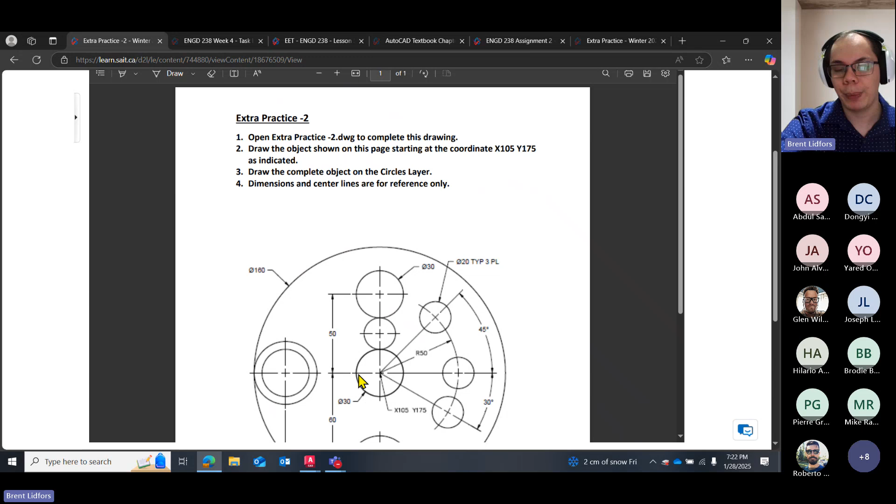You're to draw the object shown on this page, starting at the coordinate 105, 175. Remember, follow the directions—you don't want to accidentally center this on the origin. There's a reason for that, we'll talk about it in a bit.

You're then to draw the complete object on the circles layer. By default, it's set to the circles layer, so you don't have to fiddle with anything. You should be able to just draw it as soon as you open up the drawing file.

Just like with assignment 1, the dimensions and center lines are for reference only. I don't expect you to draw these center lines on the circles or draw in any of these dimensions. The drawing itself should be to scale as described in this image, but you don't have to draw the actual dimensions themselves.

So if I open up AutoCAD here, I have an example, and I'll also open extra practice 2 here. When you go to download and open extra practice 2, you might be shown this little pop-up about proxy information. This is letting you know that another software, or another add-on on AutoCAD that you don't have installed, was used to make this drawing.

That's not a big deal, it doesn't matter—it's just kind of an artifact from when this was made. You can just hit show proxy graphics or do not show, there's no real difference, then hit OK. You get another pop-up box, just hit do not show or show. It shouldn't show anything anyways, but hit OK and you should have the drawing file ready for you.

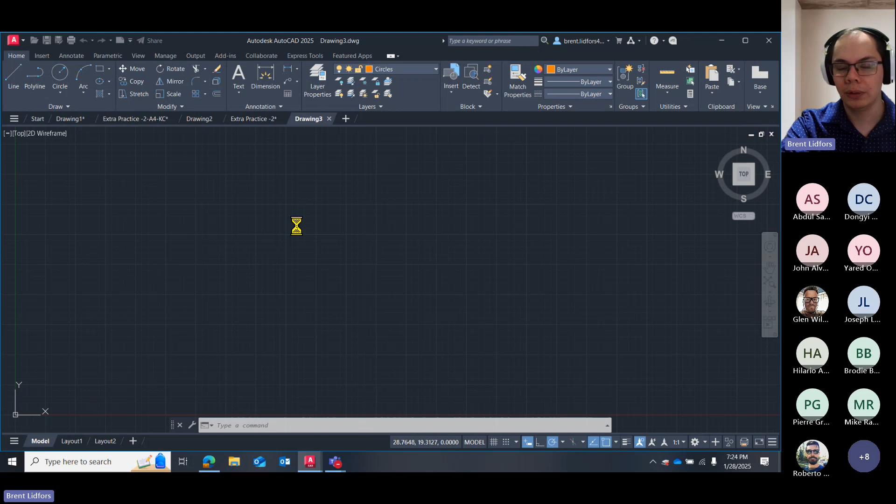One of the key reasons why we need to use this drawing file instead of, say, a new drawing file—if I hit just the new plus sign for a new drawing—first things first, we have layers in here. The layers panel is just here. We'll talk about this in more detail.

It's not highly critical right now; the only thing you have to make sure is that the circles layer is active. So up here in this drop-down menu, it should say circles. If it does not, just click the drop-down menu and select circles, and it should set you back. That being said, by default, when you open this drawing, you should be on circles already. So that's the first thing, outlined by the instructions: make sure you complete the object on the circles layer.

So if I go back here, you'll open your extra practice 2. You'll go through, make your drawing to spec with the right coordinates, and you should end up with something that looks like this.

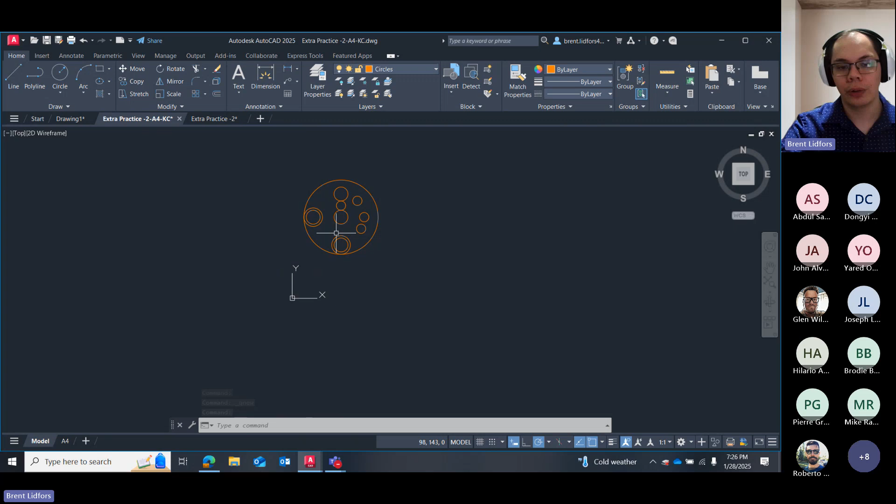So this circle, or set of circles, is not centered on the origin. It starts at the correct starting point. All the circles are placed. You can see there's no dimensions on here—the dimensions are not necessary. It's in orange, so I know it's on the circles layer here because the circles layer is also orange. So this is my completed drawing.

I've drawn everything. It looks similar to this example. It's on the right layer, it's at the right starting point—I'm good to go. Once you've finished your drawing here, going back to the Extra Practice 2 PDF, that would end this assignment document. I've finished all these instructions, I'm good to go.

Going back now to the Assignment 2 PDF. So I've gone through the procedure. I've completed Extra Practice 2. I've grabbed it, etc., etc.

I'm done that. Now when I get to deliverables, it says I need a drawing file and a PDF file. So it's one drawing, but I need 2 files. Unlike assignment 1, where there are 2 drawings, 2 separate drawing files that you submit, in this case it's one drawing, but I need it in both .dwg and .pdf. And we'll show you how to do that as well.

Again, same file name format: your name, first name, last name, assignment 2, and one will be a drawing file and the other will be a PDF file.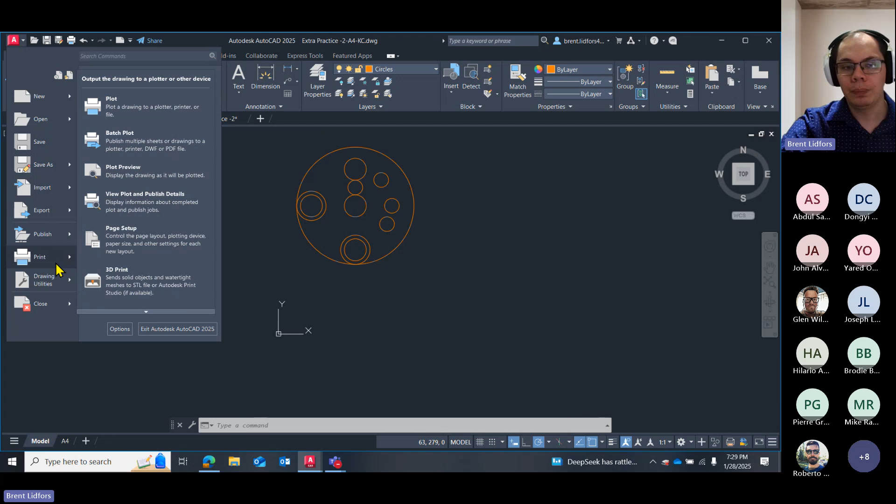And down where it says print, I get some options for plotting. Plotting is the general drafting term for making this drawing into some sort of printable format, either a PDF or an actual physical print or anything like that. So when I go to print, I'll hit plot.

It might give me this little batch plot pop-up. You can just hit do not show me this again, continue to plot a single sheet. We don't need to do batch plot. It's just a feature if you need to plot a whole bunch of layouts at the same time. We're only doing one, so I just needed to plot a single sheet.

And I get the plot menu here. So from here, you're going to notice if you do it the way I've done it so far, our page setup has no name because we haven't saved it as a name yet. And our printer plotter is empty here. We have to select one from the drop menu here.

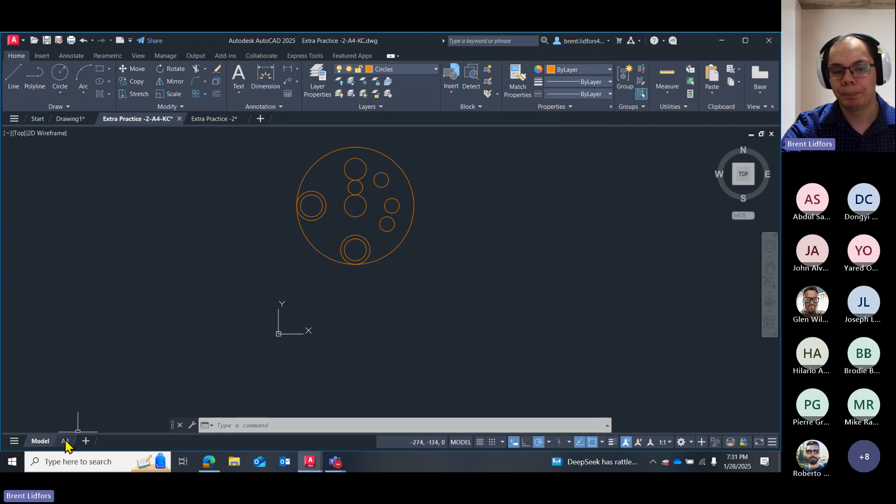This is the incorrect way of doing this. What I need to do first, the process is correct, but I've made a mistake. What I need to do is go to the A4 tab or the A4 layout at the bottom left of my screen, and then do this process.

So going to application menu, print, and it should give me where my printer plotter now says DWG to PDF.PC3. So if you don't see the plotter automatically filled, you're in the wrong place.

So when I go through that process, again, I switch from the model space to this layout. We'll talk about layouts in more detail down the line. A layout is a format for that drawing to be printed on a specific size of paper. So this would be what the drawing looks like when it's printed.

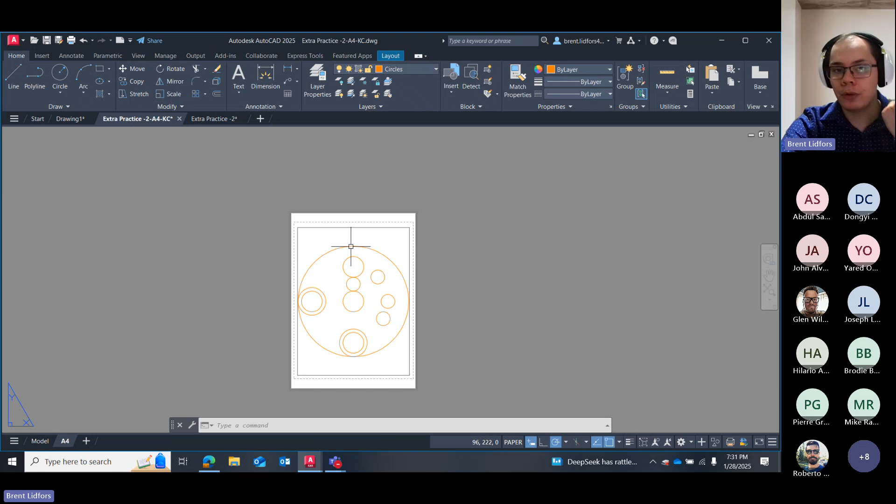This is why, A, you need the right drawing file, because this layout won't exist if you have the wrong drawing file. B, if you start at the wrong starting coordinate, your circle will not fit in this page. Your circle will be down somewhere to the bottom left, and it will not be inside the page.

So that's why we need the right starting coordinate, because otherwise, if I move this all down, let me move that properly. If I move this and start it at the origin instead, just approximately, if I go back to my layout, you can see it's gone. So that's why we need the right starting coordinate as well.

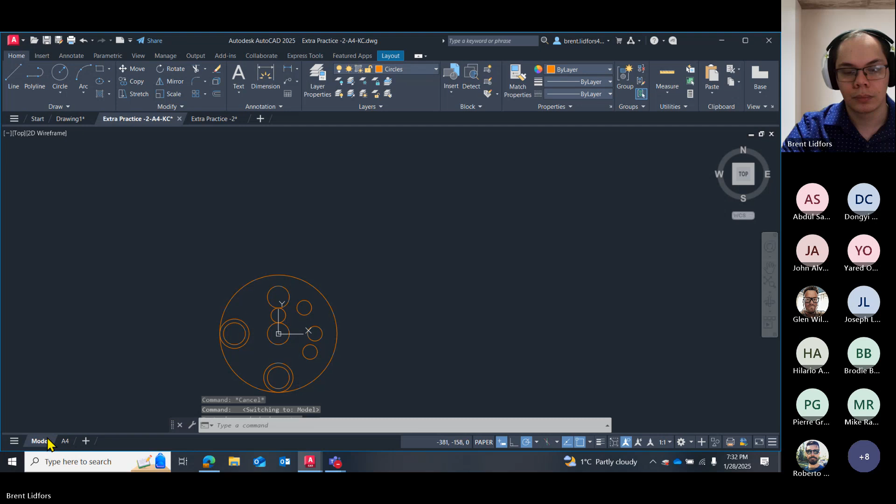If I undo that here, your circle should fit nicely into the layout.

So again, I've gone through my drawing. It's on the right layer, it's the right dimensions, yada yada, I'm good to go. When I need to turn this into a PDF, I'll go A4 layout, go to my application menu, plot. You can just click on print right away, or you can go to the plot here. And it should say DWG to PDF. I don't have to do anything from here, I can just hit OK. Everything should be set up normally by default.

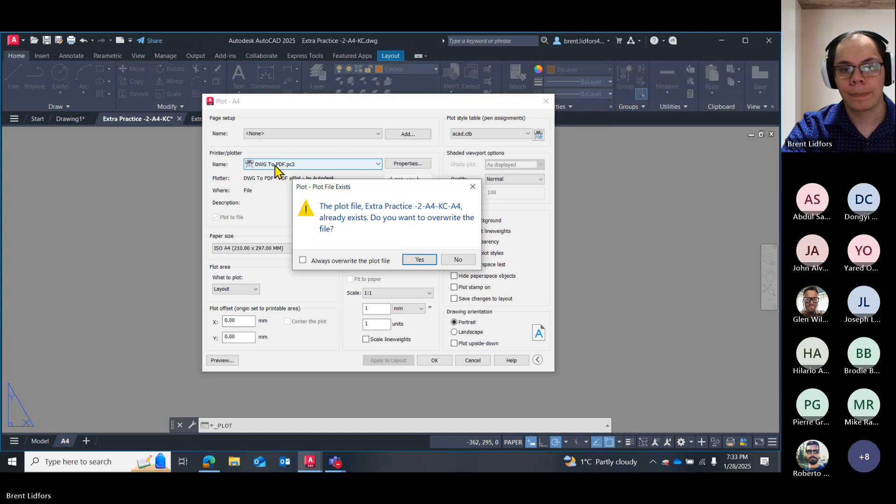And if I go to save this now, I'm going to overwrite this PDF I made earlier. I'm going to overwrite it here. Then I should now have a PDF file based on that drawing. Okay, so I saved it to my desktop. So if I open it from my desktop now, then I get my drawing.

An easy, really quick way to make sure that you've done this correctly: the circle should be fairly centered on the page. It shouldn't be peeking up from the bottom or cut off in any way. It should be right smack in the center of this paper. If it looks like it's kind of out in space somewhere, or if it's missing entirely, you've missed a step somewhere.

If I do this from the model space, so if I go from model and print and manually do this, drawing to PDF, let's call this one 2. Then I get this really tiny guy down here. So make sure you're on the correct layout before you print to PDF. If you're on the model space, it's going to take the size of your screen or the zoom level that you're at, and that's not correct as well.

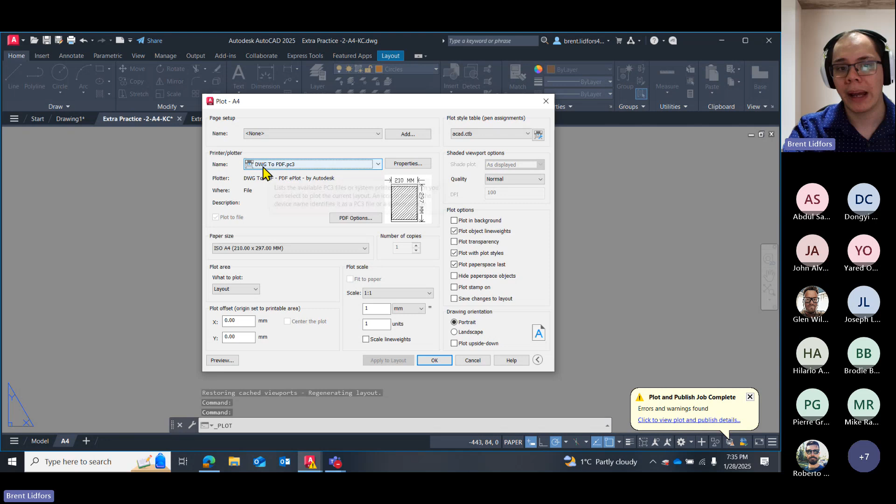So just to recap the proper way: I've made my drawing, A4, application menu, print. It should automatically give me drawing to PDF, and I just have to hit OK. Name this by the file format. My name, assignment 2, save, and there it is. Okay, so now I have a PDF file, Brent Lidfors assignment2.pdf. It looks right on the page. I'm ready to submit that into the Dropbox. Okay.

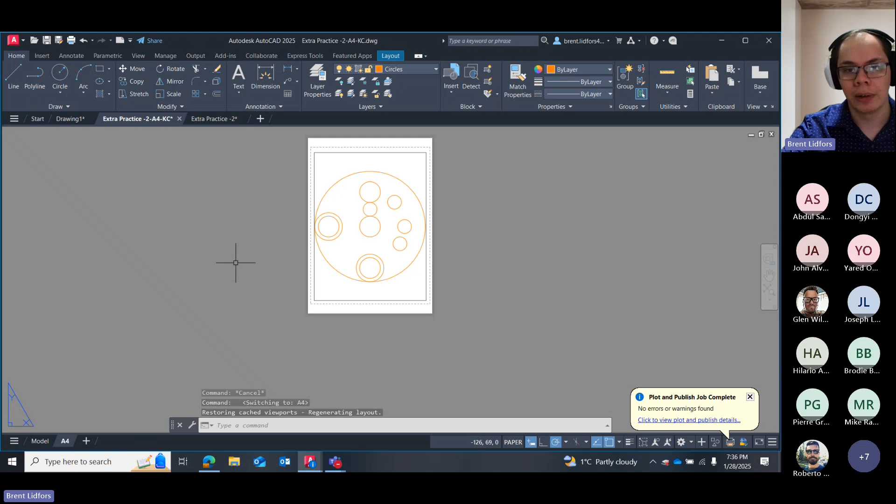Any questions about that process at all? I'll go through it again. Auto center on the PDF — that technically is the way to auto center to the PDF. When you design a layout, we'll talk about it in more detail down the line when we actually do layouts. But the layout here is designed in a way that this is kind of a window into the drawing area, and I can center that on any object that I want. This one's done with zoom extents, so I can use zoom extents to center that object onto the layout itself. Again, we'll talk about it down the line, but technically layouts are the way to center an object on a PDF. This one's already been done for you though.

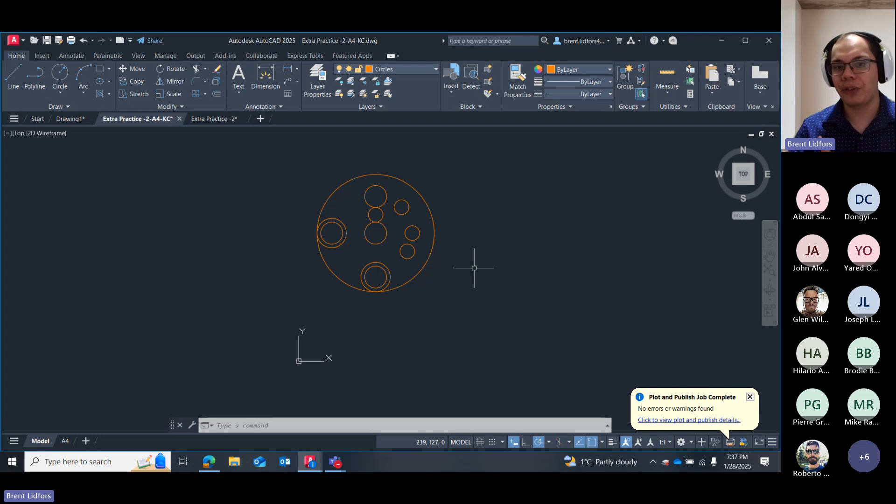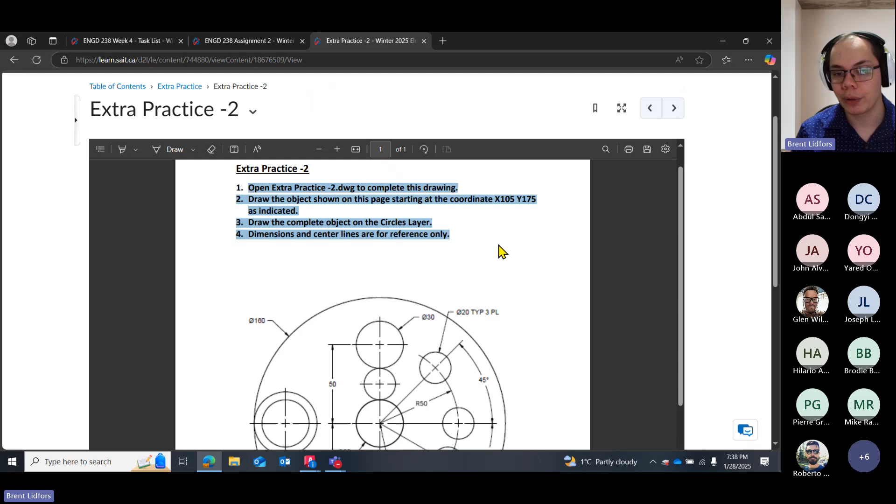Whenever a test comes up, that test is usually testing you on something that you just covered. So similarly with assignment 2, it's likely covering drawing with precision, object snaps, polar tracking, object snap tracking, maybe ortho mode if you choose to use it, things like that. So what I'm most looking for here is things related to that and that you've followed the instructions accordingly. Okay? So as long as you're okay with the instructions here and you've followed this to a T — right file name format, you have the right drawing in PDF — and on Extra Practice 2, you've followed all these directions and satisfied the requirements of drawing with precision, there's nothing really I can dock you on. Okay?

And again, if you do mess up, I don't expect you to do it perfectly the first try. So just like the other assignments, you're free to resubmit once you've had your graded copy back. You can see my corrections, update it, submit it again, and I'll regrade it. Okay?

Any questions about assignment 2 at all? Any confusion or anything? Of course, you can watch this recording back too, I suppose.

I do have a question about the drawing. So with the circles, when there's kind of like a circle with a dash through it and then a number after, that's the radius of the circle?

Good question. Very good question.

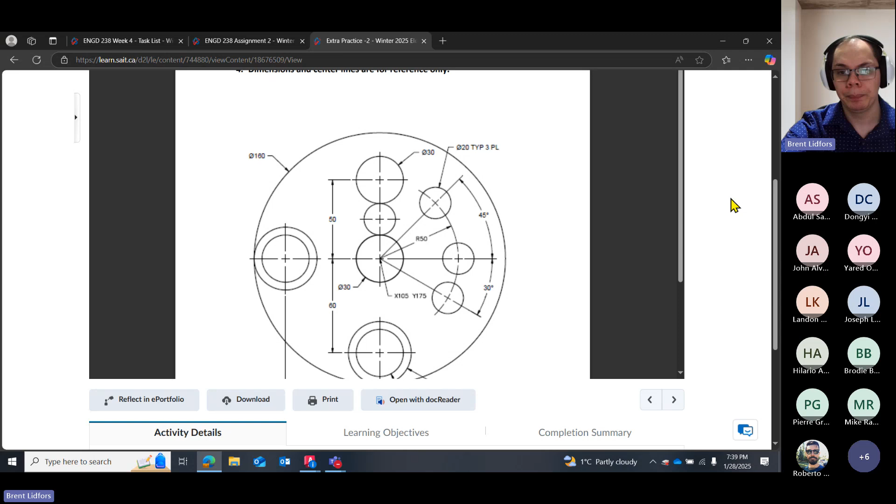So on Extra Practice 2 here, on the schematic, you'll notice there's a few symbols we haven't explicitly talked about. You're asking specifically about these circles with a line through it, right? Yep. So whenever we see a circle with that diagonal line through it, it's like a Greek letter phi, denoting a diameter.

So when it says phi 30 here, that means the diameter of this circle is 30 units. Same with this one over here, it says phi 20, so this one is diameter 20. If we see an R, however, that's denoting a radius. So where it says R50, that means there's a radius of 50 units between the center point of this circle to the center point of these outside circles here.

Anyone know what TYP 3PL might mean on here? It says TYP 3PL up here, and then there's a couple down here that say TYP 2PL. Any guesses on what that might mean? Typical in number of places. Bingo, yeah.

So TYP means typical, short for typical. The number is the number of that shape that exists that should be similar to the one it's pointing at. PL is short for places. So there's 3 of these in my parts list that are typical to each other. This is kind of shorthand in a lot of drawings.

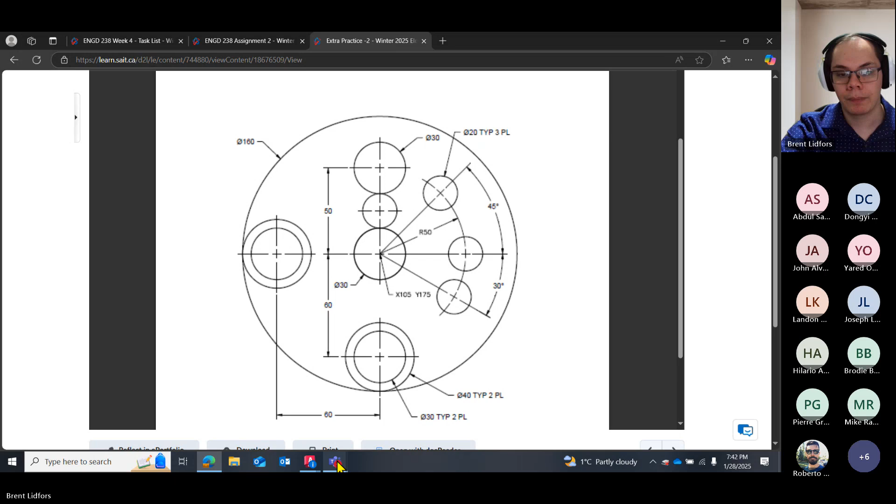How do we access the videos, like the recordings? Sure. So in order to get to the recordings, you just have to be on the Teams channel itself here. This is the same place where the Q&A is and the regularly scheduled meetings.

So by default, you're on posts. It says posts at the top here. Check it out, you need to switch to files, and then there's a folder here for recordings. All right, and if you go in there...

I don't think I'm in the channel. Or should I automatically be? I sent an email out at the beginning of the semester to invite people. I'll post it as an announcement on Brightspace, and then you can pull it from there if I haven't already. Let me double check.

I might have, yeah, it's an announcement here as well. If you go to Brightspace, there's a link at the bottom here to join. Okay, I could do that then. Thank you. Sure. Just email me if the link doesn't work, and then I can manually add you as well. Okay, sounds good, thanks a lot. Yeah, no problem.